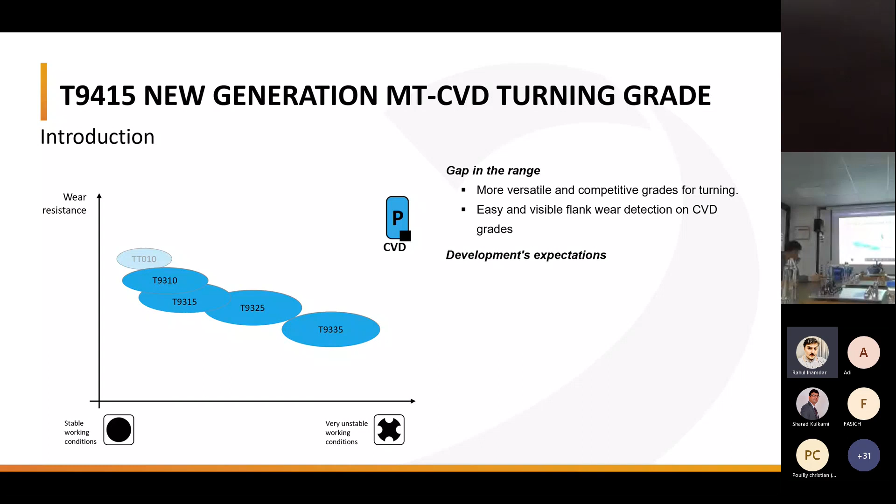We found out that there is some gap in the range which requires more versatility, some competitiveness, of course, of the grade, which can always go for interruptions, also for the harder side, for stable working conditions. And that is why what we have come up with, the requirement as the gap is that we need some reliable grade, some productive grade, at the same time which can give more efficiency and inventory control also at the customer end. That means working for toughness as well as in a similar way working for even the continuous cuts. That means stable conditions for continuous cuts for P05 or P10, P15 as well.

And that is why we innovated T9415. If you can see here, T9415 covers up the range of T9310, which is a harder grade, T9315, again harder grade, and T9325 to some extent. That means some of the light or medium interruption working conditions, application conditions. So that means one grade for many operations, right from P05 to P30 almost.

So moving ahead, a little bit more to introduce you to what can be said about T9415. So typically if you see here, the surface zone is enriched with cobalt bonding phase, which again is for adhesion and toughness-demanding operations where it is required, that can cater to those kinds of demanding operations. Also the new substrate is a functionally gradient material, all new substrate for T9415. Again, the adhesive-resistant TiN layer, abrasion-resistant TiCN layer on top, and again for heat resistance, there is always an alpha Al2O3 layer in T9415.

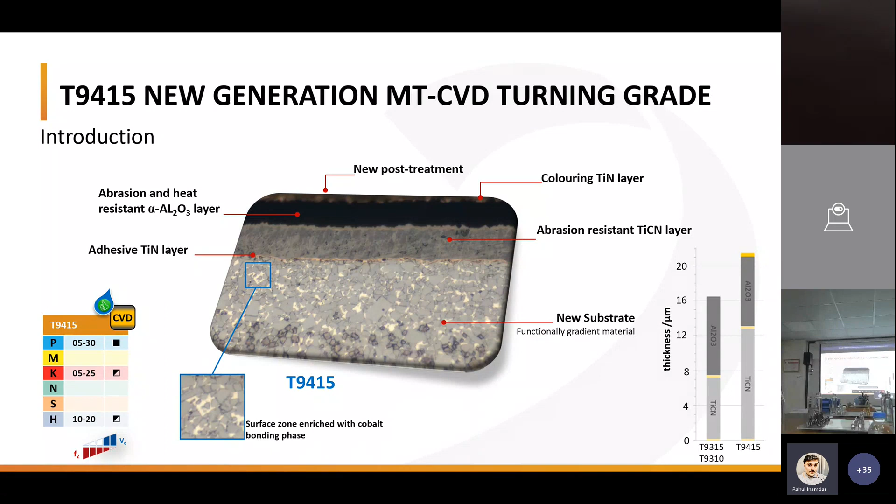Moving ahead, new post treatment process all the way, and this is again one of the unique features which is adding the feather on the crown of T9415, why it is a champion grade, you can say. At the bottom you can see application areas from P05 to P30, and from stable machining conditions to unstable machining conditions.

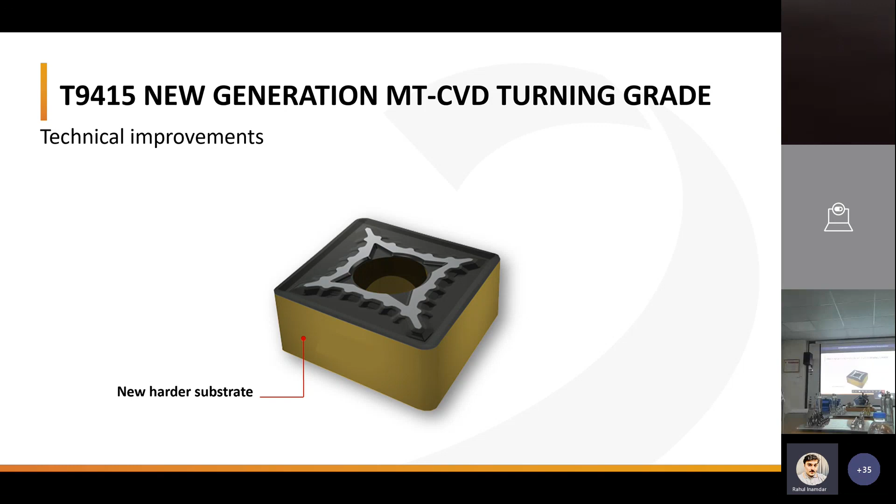Let us move on and see some more technical improvements. If we look closer at T9415 insert, we see a new coupled layout, with new color layout, and many new additional improvements we've added to this fourth generation of CVD coated insert.

Fourth generation of CVD coated insert. A newly developed harder substrate with 5.5 percentage cobalt, which is slightly harder than the previous T9315, but not as hard as T9310. Of course, it is a harder grade.

These inserts are produced within state of the art electronic press machines at our factory, resulting in tight repeatability, tight tolerance of the insert, and this ensures high precision indexability. Please remember, we have very high and tight repeatability insert tolerance, meaning higher precision indexability possibility for T9415.

That means reduction in downtime, fewer cuts for the programmer on the machine, elimination of non-productive times. The measuring cuts, when you make a first cut and measure on the machine, when you give the offset in the controller, that also reduces thanks to this state of the art electronic press machine insert, fourth generation. The new generation is also CVD coating on T9415.

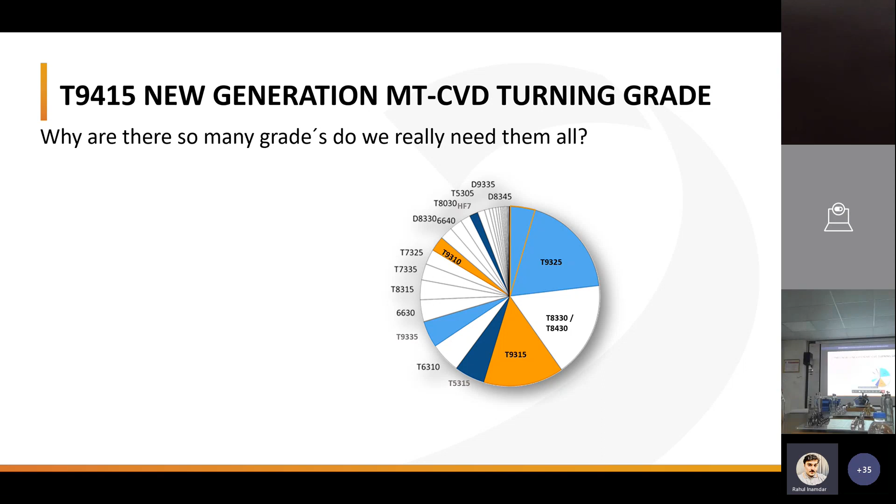T9415, my friends. Moving ahead, let us talk about why we generally have so many grades. Do we really need all of them? Before we look into the new assortment of MTCVD fourth generation, there are different grades for different applications, PVD grades and also CVD grades, each with their own hardness and own characteristics for machining, with different grades and different hardness.

However, when it comes to T9415, which I have conveyed and told you, it covers most of the grades like T9310, T9315, and almost half of T9325. So that covers most of the part of our grade chain as well.

That means, please remember what I said before - sometimes the end user, the customer, must run with lower speed and lower feed, and then compromises with the productivity, compromises sometimes with reliability as well, and then customer has to go for a different grade, different chip breakers as well. But thanks to T9415, we can go towards tougher conditions and harder conditions for longer continuous cuts and also interrupted cutting. So maybe we can squeeze down the requirement from 2 or 3 grades to 1 grade.

Please understand, whenever you visit a customer, always ask the customer why, and what you can do for them, what benefit you deliver to them. Do customers really require 2 grades? And you can always say, Mr. Customer, no problem, I have T9415. Let us go with 1 grade, solve all your problems and all your applications. So, a single grade.

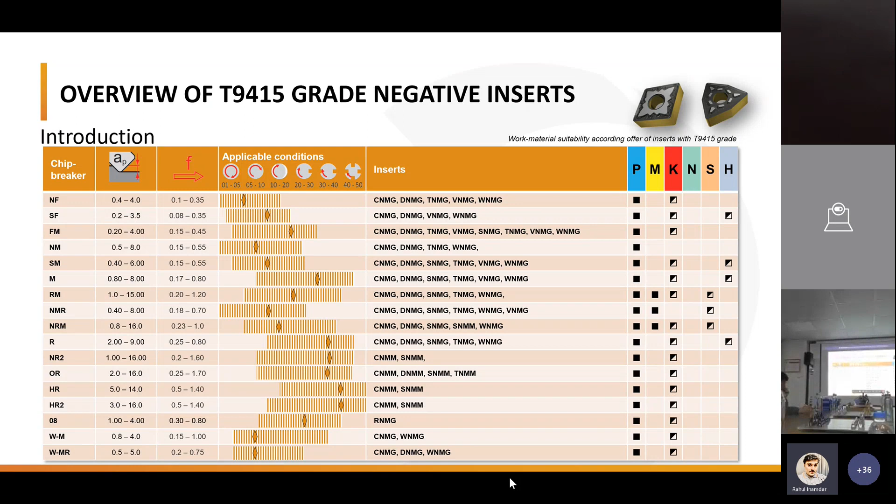So this is a ready reckoner for cutting conditions and chip breakers for negative inserts. This is also available on the website and in the new product catalog, so you can always go through all the chip breaker navigators.

Here I would like to emphasize more and make you remember: whenever you go to the customer, we generally look at roughing and medium machining operations, but sometimes we overlook finishing operations. Remember, the most pain areas for customers lie in finishing operations, because finishing is sometimes the last operation, which can give rework or rejection, and customers always have this pain in mind in their production line.

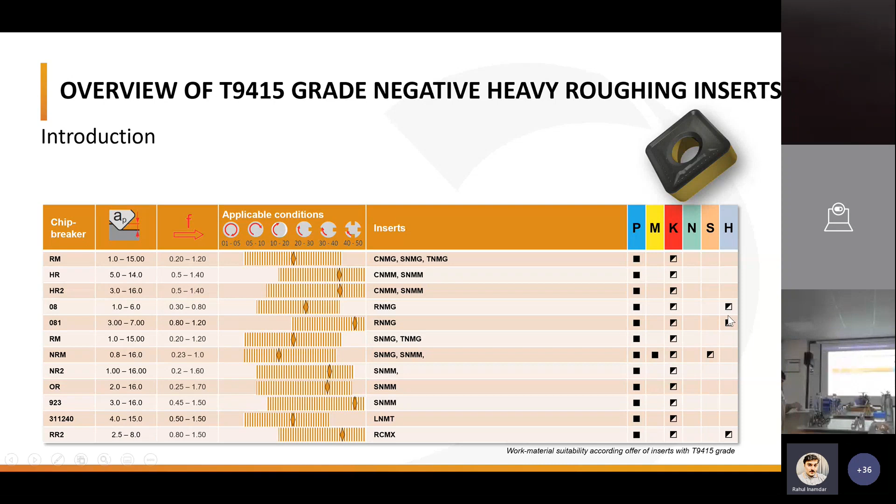So please don't look only at CNC lathes, look 360 degrees. Walk the shop always, talk more, ask more, and see where we can apply our inserts. Let us be more hungry to find where we can give value to the customer, and that will also give us a higher, stronger relationship benefit to all of us.

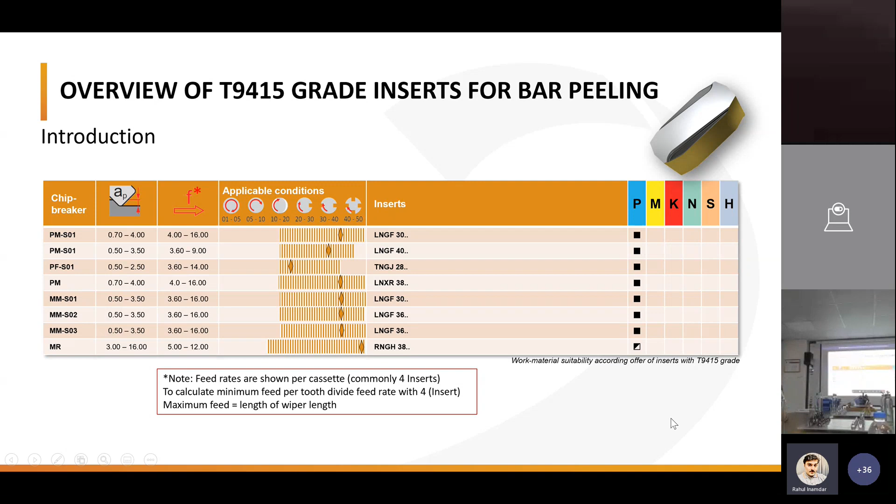Also for railways, we now have an assortment including railway wheel turning inserts and returning inserts. So we have chip breakers available with us for T9415, even for the bar peeling segment. Wherever you have a customer base in bar peeling, remember we have T9415 for bar peeling operations as well - this is a great benefit because bar peeling machine hour rates are higher, so the longer tool life we give, the more benefit the customer gets.

Here again, I would like to emphasize more on the applications like high cutting speed to medium cutting speed, stable machining conditions, unstable machining conditions. We can apply T9415. Customers with the portfolio of general engineering, power generation, automotive, medical, agriculture, railway, bar peeling, metallurgy segment - so where we should look upon, where our T9415 we can apply and take the benefits.

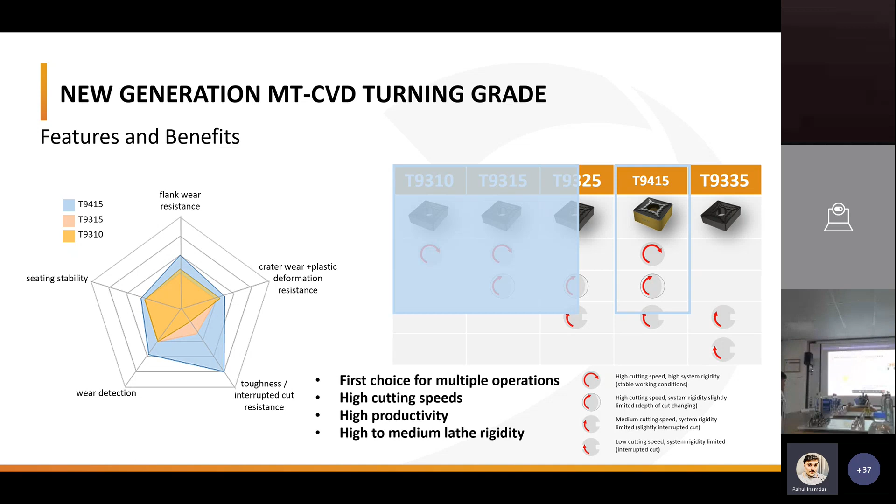You can see here this covers T9310, T9315, and half of the T9325 area. So this is how we should look at it as a definition - high speed, high productivity, even with high or medium rigidity of the lathe machines.

And now you can see, okay, we can go from continuous cut to highly interrupted cutting conditions as well. Some of the oil and gas components, SAE 1045 carbon steel - here also you can see the feed rates and cutting conditions, around 3mm depth of cut, and from 5 workpieces compared to previous ones, T9415 delivered 10 workpieces per cutting edge, so doubling the production.

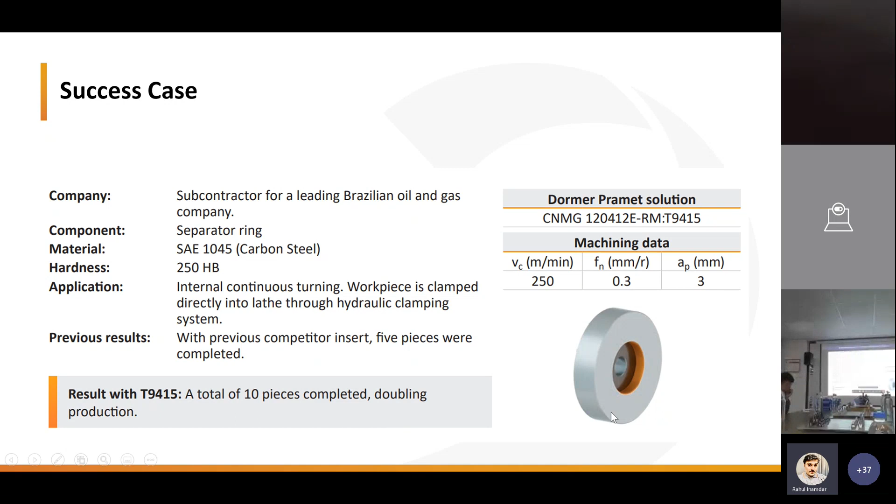That means also reduction in non-productive time and reduction in not only the tool cost but also the total cost. Remember, you always have to remember when you increase the tool life, that means we are also decreasing the total cost as well. So please always talk and remember this in mind.

So whenever this kind of component comes up, please remember apply T9415 because it's the best choice and the only choice available in the market of metal cutting industries, my friends.

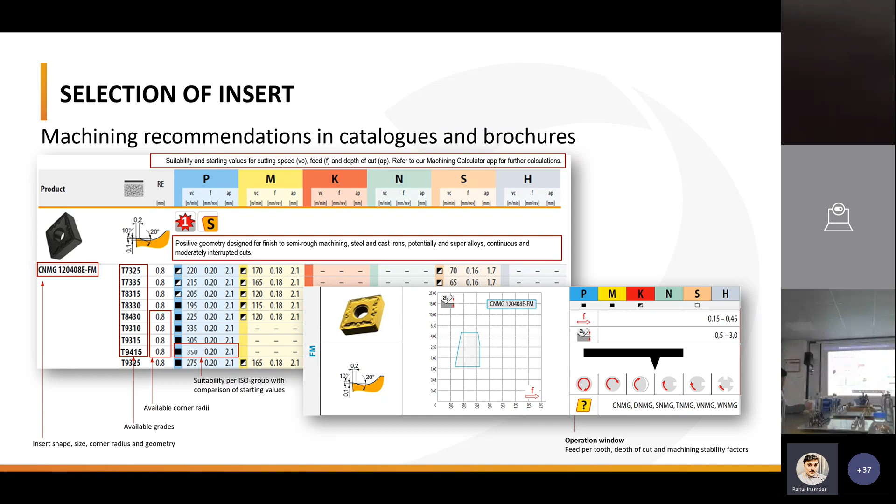Moving ahead, let's talk about the recommendations for T9415. We all know it's available on the backside of the inserts, and also on the web page. I'm sure you'll download the calculator, and from there you can also check cutting parameters. But generally, as recommended cutting conditions compared to our own T9315, you can consider plus 20% compared to T9315.

Again, I'd like to show you this comparison about the longitudinal turning test: endurance in continuous cut, and also endurance in interrupted cutting.

You can see here, from 320 meters per minute to 120 meters per minute in interrupted cutting, the cutting edge of T9415 - you can see the flank wear - compared at the same time to T9315 and T9310.

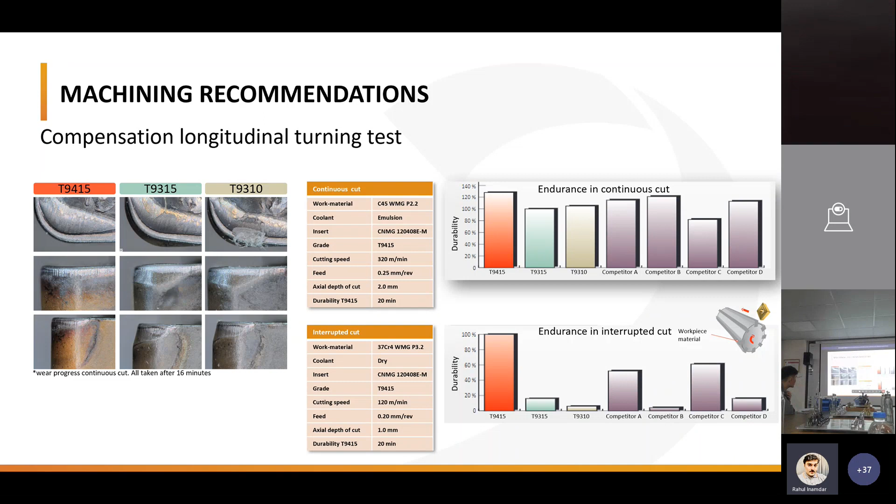This is amazing, I'm super excited. I'm very confident looking at these wear conditions of T9415. What else do you require, my friend? This is the best you can carry now with you to our customers.

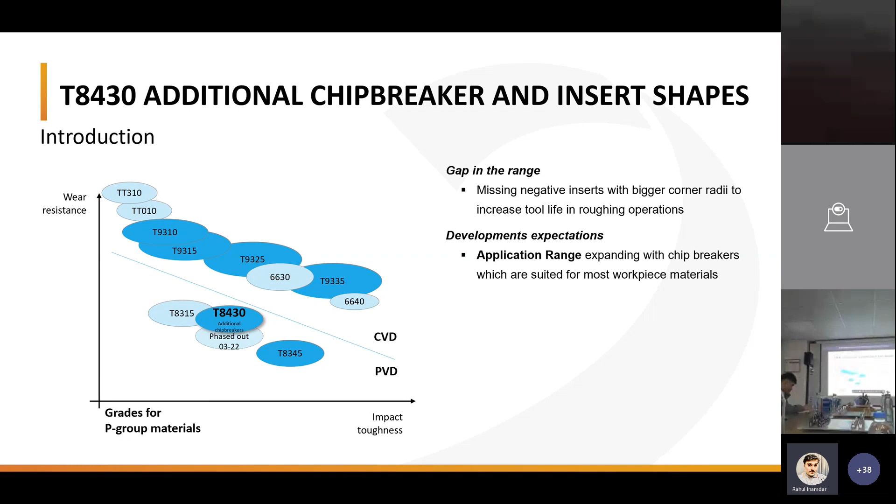And to fill this gap, we have introduced an all new T8430. You can see here the new symbol on the slide, introduced in this new product launch.

Again, T8430 has a submicron grain substrate, less than 1 micron, with relatively high cobalt content, and the substrate has undergone improved ion cleaning with perfect adhesion to the coating layers. You can vouch on that.

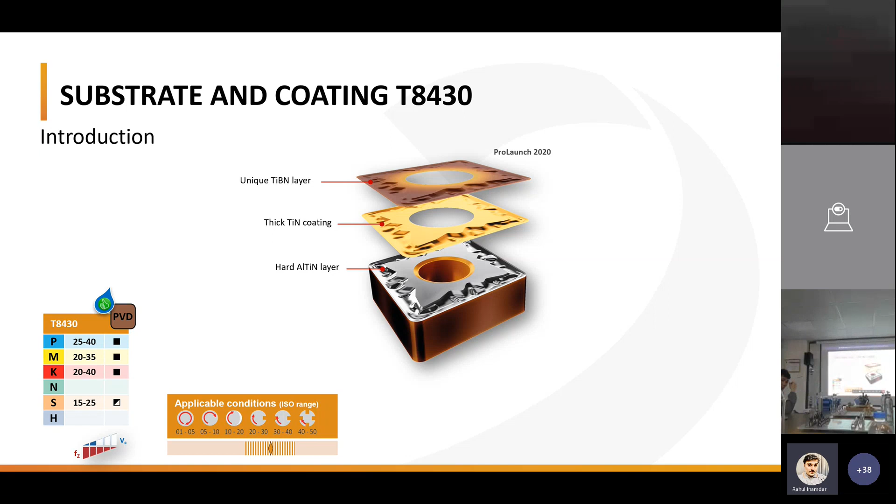This was launched in 2020, and in this new product launch we have the additional negative insert with chip breaker NMR, NRM, and RM, as you can see in this slide, along with shapes like CNMG, SNMG, TNMG, and so on.

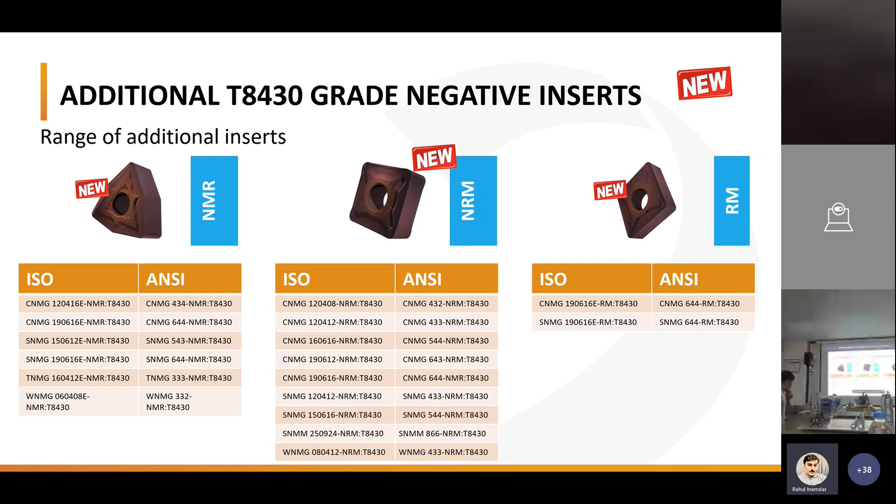Also the range of additional inserts: CNMG in 1.6 nose radius with NMR geometry chip breaker, also CNMG with 0.8, or SNMG with 2.4 millimeter with the NRM chip breaker, and similarly 19mm SNMG with RM chip breaker. Here you can see the overview of the product portfolio of chip breakers for negative inserts.

So that is all can be read from our web as well, and also from the insert box. So moving ahead, if I talk about the positive insert, we have the product portfolio of chip breakers.

Please remember, if you establish finishing positive geometry, positive inserts on the machine, that business will last longer. It will not be replaced immediately or easily by any competitor.

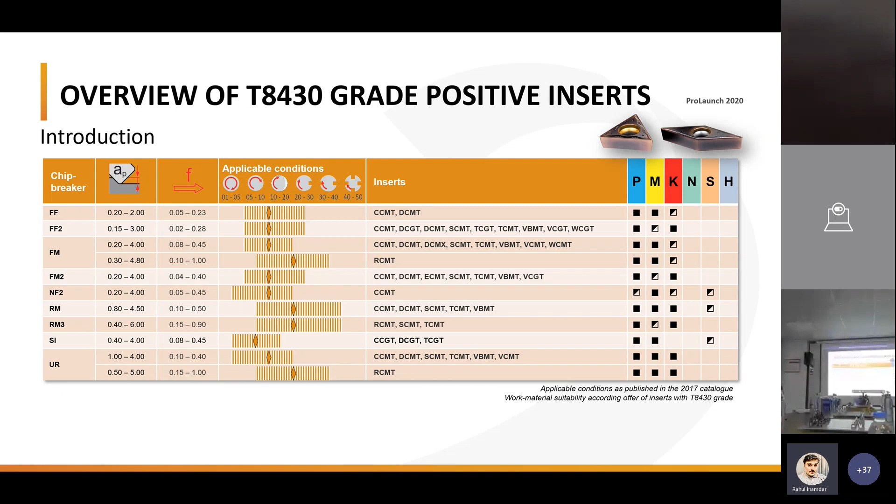When it comes to customer segment, components, application, workpiece material, and competition, you can refer to this chart even afterwards. It is for general machining, automotive subcontractors, maintenance and repair, automotive industries, and all sorts of materials you can consider.

When I talk about the sales information, the benefits for the feature - what is the benefit about improved ion cleaning? It ensures perfect adhesion between substrate and coating layers, which increases dimensional accuracy, consistency, and repeatability in dimensions.

What benefit does the TIB top layer give? It reduces built-up edge, because some materials have a tendency of stickiness, welding on the cutting edge - we call this built-up edge, for ISO M type materials, even low carbon material. This top layer helps reduce built-up edge, which increases process security, repeatability, and productivity.

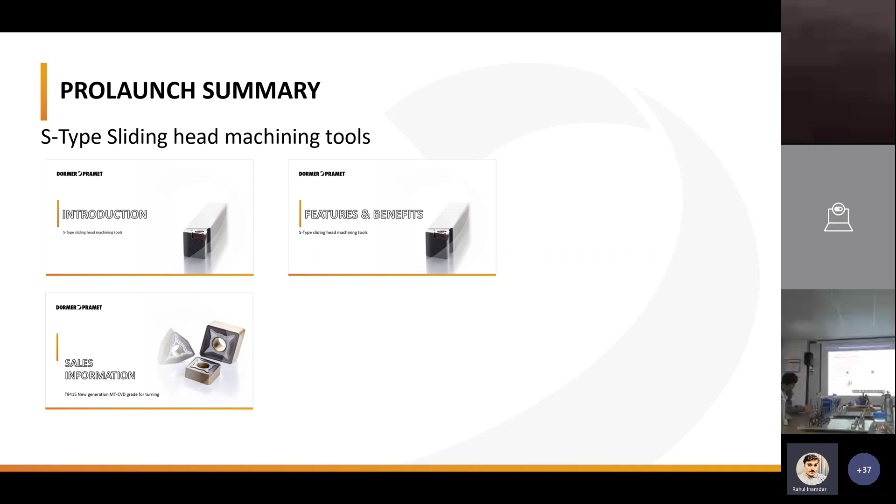When we talk about these S-type sliding head machines, in our actual turning assortment we offer small shank size turning tools. But when it comes to sliding head tools, we generally do not offer any kind of these tools.

But with this product launch 23.1, we introduce a new range of turning tools which can be used in sliding head machines, also commonly known as Swiss type machines. These machines are generally used to produce small parts in very high volume.

As much as possible, tools are equipped on the machine, and the machine offers the possibility to run multiple tools at the same time on the workpiece. This dramatically lowers production time and reduces cost per piece. So we offer smaller shank size tools for sliding head machines.

Here you can see what is in it. With the SCACR or L external sliding head tool we launch now, we extend our assortment of tools which we can use in this type of lathe.

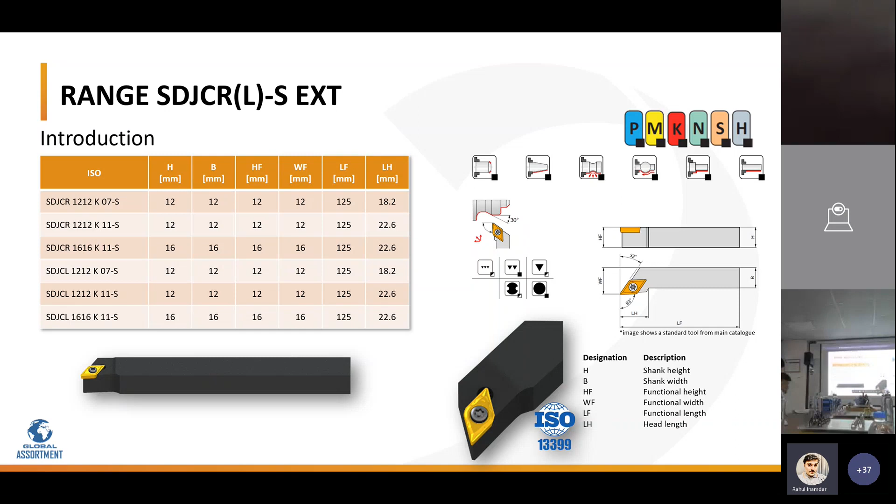Similarly, you have SDJ for D style insert, screw lock tools for 93-degree cutting edge angle for positive DC style inserts. That is available for DC style insert in 7 and 11 millimeter insert size.

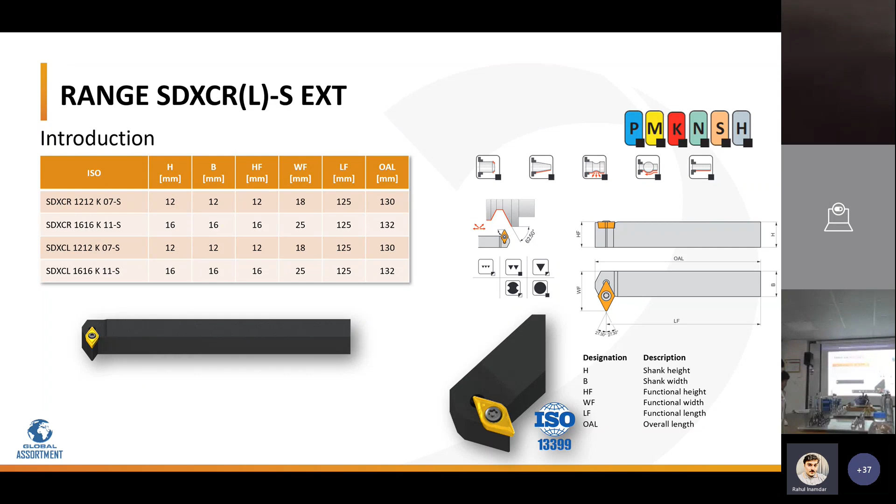Let me repeat and remind, this tool has the same functional width WF as the shank width B. Same functional width, meaning you can generally say and talk about a zero offset. So we have now extended with this tool, even tool with SDX, CR and CL. That is also now available in our product launch.

New SDU-CL type holders, 93-degree cutting angle with shank size of 20 millimeter, 22 millimeter, again for even 7 millimeter DC style inserts. So that is very important, and be aware of it when using them in a sliding head machine. This is for external machining operations.

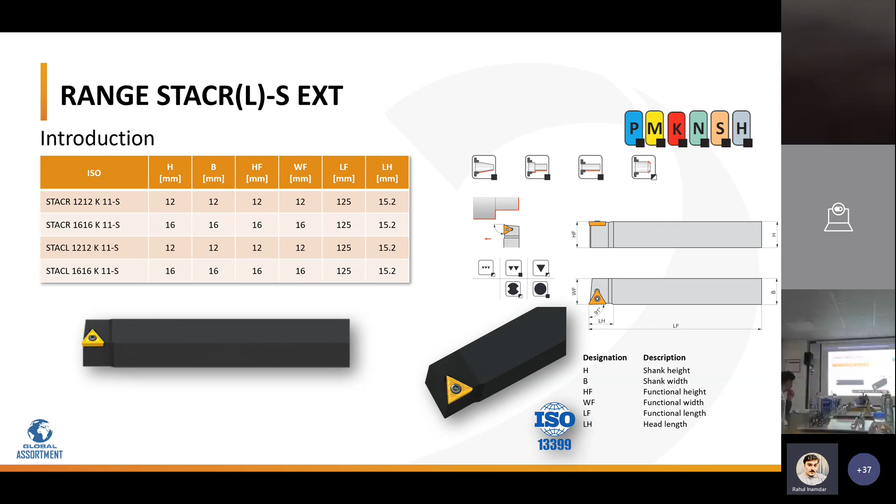Again, a 91-degree cutting edge angle for T style insert, TC style insert, 12 by 12 and 16 by 16, four tools. That's important. Again, what are the typical customers?

Components, electronic industry - my friends sitting in Vietnam, Japan, Thailand, Indonesia, even New Zealand, or in different places like Malaysia. Small tools, small sliding head machines like Citizen, Star, Tsugami, Hanwha - those machines. Now we have tools for them, for medical industry, for aero industry, and so on.

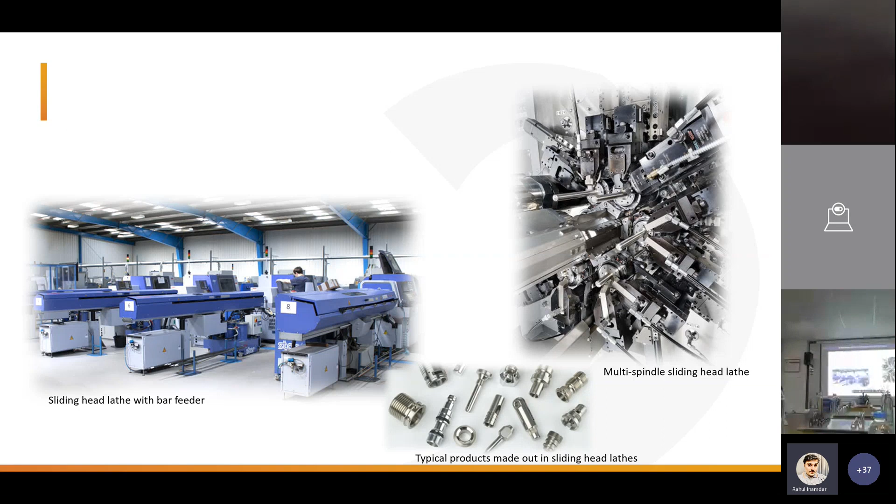So if I talk about the benefits, you can see here the small parts which we have been referring to. As explained in the previous slides, the main topic for sliding head machine is to produce as many parts as possible, at very high speed, and the functional width WF is the same as the shank size B.

You can see here the tool holder is sliding from one tool to another. That means the previous cutting edge - if the tool is replaced, the cutting edge is at the same position as the previous insert. You are with me, you follow me? When you replace the tool, the cutting edge is at the same position as the previous insert.

So that is to be remembered. But also remember, this is valid for different insert shapes - the positioning from new insert shape is more precise compared to a common tool holder. Also remember, tool types SDFC, SDXC and SDUCL do not have the same WF and shank width B, meaning these three tools cannot be replaced as explained in this slide. So that has to be remembered.

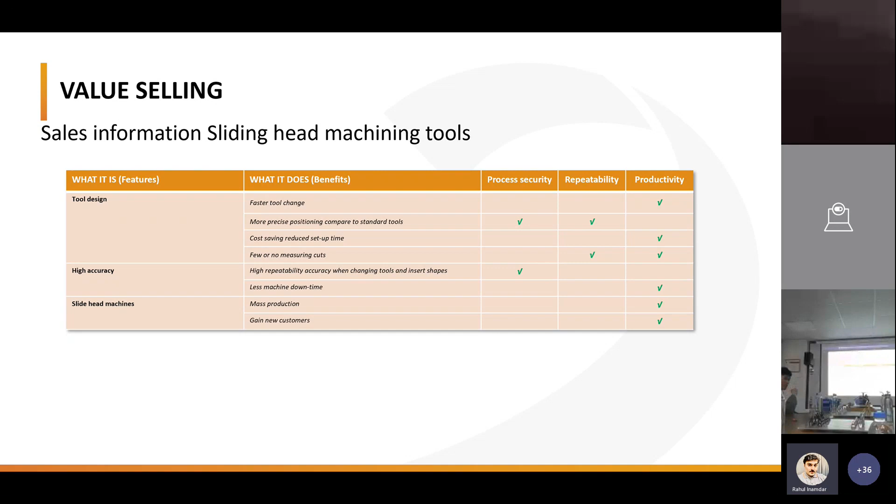That means faster tool change, zero offset, more precise positioning compared to standard tool, cost saving, reducing setup time, and you can also count on few or no measuring cuts. So that means it's straight - you just put it and start it. Isn't it interesting? That is interesting, my friends.

So this is about the new assortment for sliding head machines. Moving ahead, let us talk about the extension in the KR chip breakers.

When it comes to the KR chip breakers, we have inserts with the KR chip breakers. So we are doing expansion of insert shape and radius with the KR chip breaker. We found some missing gap in negative inserts with bigger corner radius to increase roughing capability in cast iron and hardened material. So this is the KR extension here with us in this new product launch.

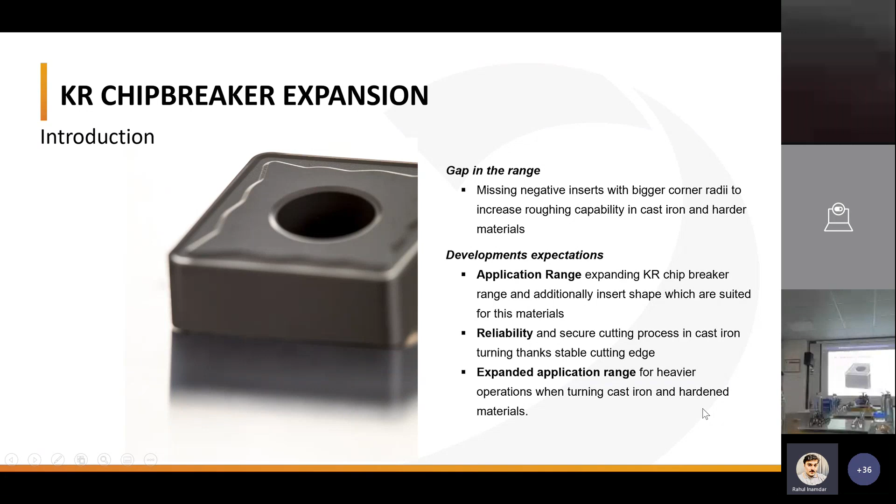So to meet the expectations in cast iron applications or hardened material applications.

Moving further, we all know the coating T5315 for cast iron turning with WC cobalt based substrate, which ensures an optimal ratio between hardness and toughness and resistance against plastic deformation. It has a textured Al2O3 layer, which offers improved abrasion and crater wear, and the grade with high hardness provides the basis for highly productive machining with the highest cutting speed, my friends.

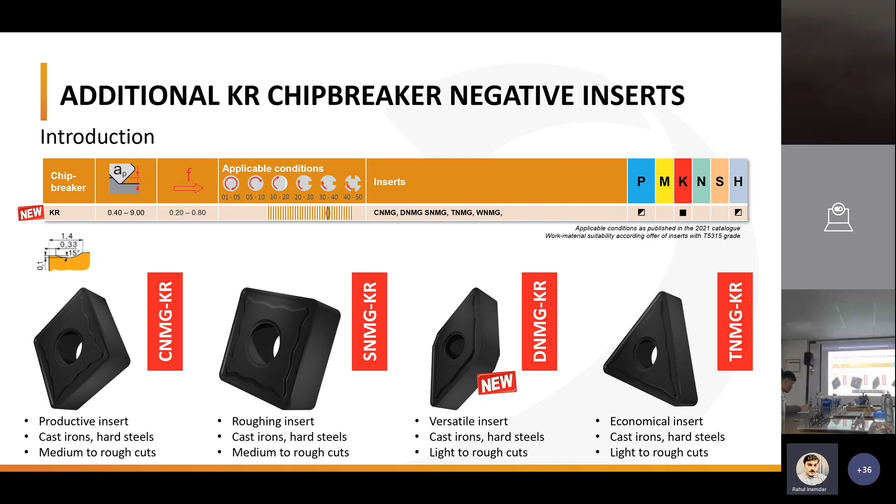So looking ahead, what is new? The KR chip breaker in CNMG, KR SNMG, and also for DNMG, TNMG insert as well. The newly added inserts feature a strong KR chip breaker with a wide neutral T-land. Wherever you have a lost application, or when you visit customers and find roughing of cast iron, skin removal cast iron, or chilled iron where we don't have it in our kitty, now you can have the new KR chip breaker in our assortment. Please apply this KR chip breaker with this product launch in March 2023.

DNMG inserts are also now available in two different radius versions. This shape is ideal for versatile turning applications. Whenever you find, for example, differential cases, cast iron components, carriers, housings, where the material is FCD 450, FCD 500, or even higher tensile strength cast iron materials, these are the choice.

Components like motor body housing, cast iron housing, disc, brake housing, even calipers or cylinder liners - those components, my friends, where we were lacking with products - now we have the products in our hand. Apply the products to those components. Now we have a chance to say yes to the customer, yes to the applications, my friends.

So if I talk about the customers, as I told you, general machining, heavy duty, all sort of components and so on. For this components and workpiece material, we have competitors like Sumitomo, Tungaloy, or even Mitsubishi. So please try to hit them, and then you can get the highest level of benefits out of this new grade, new chip breaker in KR.

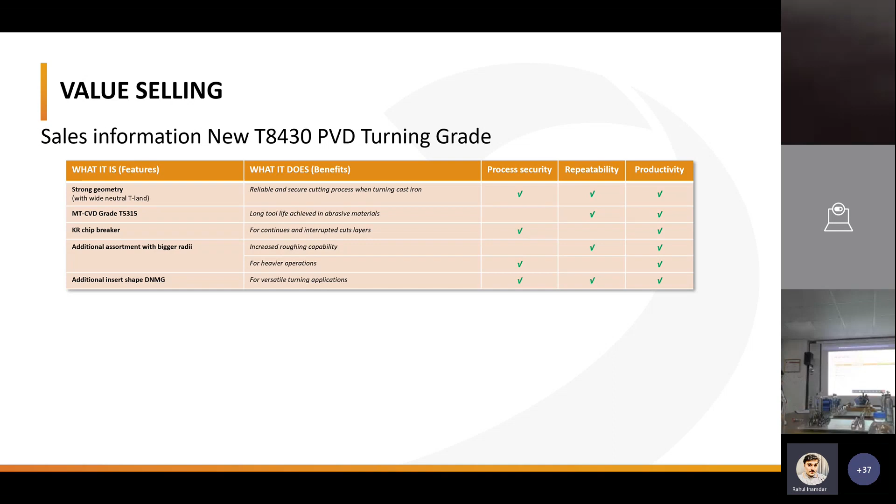Moving ahead, some features. If you ask what is the benefit of the KR chip breaker - it is for continuous and interrupted cut layers, as well as versatile turning applications. So this is about the KR chip breakers in turning, and we are almost done with the turning part of the new product assortment.

So to summarize, what we have seen is our new champion T9415, expansion in T8430, expansion or new chip breaker KR, and also different extensions in other inserts as well. So this is about the turning.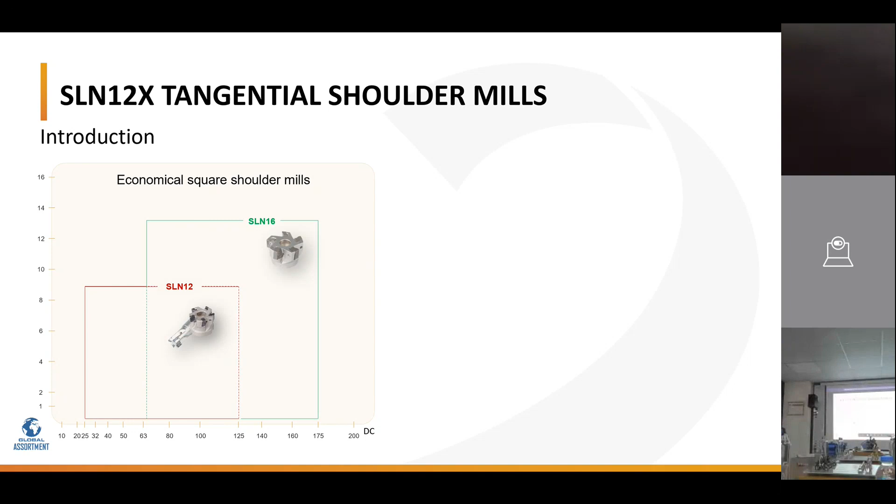Moving ahead, let me introduce you - we already have in our economical square shoulder milling solution SLN 12, and also SLN 16 up to 150-175 millimeter diameter range. But at the same time, we found gaps for tools with improved body strength and thick cutter core, and also a gap to find cutters for lower cutting force machines that also reduce spindle load, as well as tools that can be very high productive tangential tools, additional to the economical concept of tools, for a wide range of applications.

So considering everything, the expectations were a true 90-degree corner, improved wall accuracy and straightness, and very competitive lower cutting force. So those are the expectations and the gap.

Considering that we have come up with this additional new concept for tool shoulder milling to improve customer productivity, right from diameter 25 to diameter 125, both in parallel or Weldon shank and also in shell mill. So, after a successful introduction of the SLN 12 and SLN 16 economical tools for square shoulder milling, this project has started to further expand the offer of SLN 12 millimeter into the tangential family, tangential cutter.

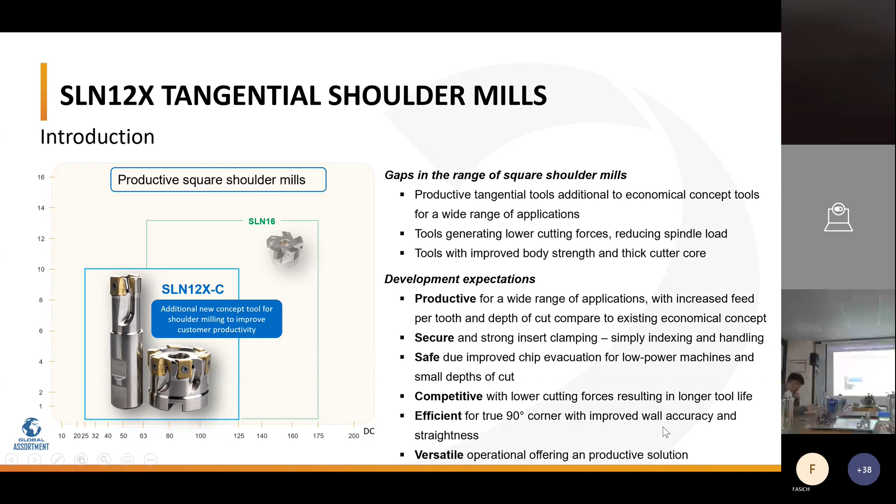Furthermore, some positive rake angle combined with a patented U-groove segment, to enhance chip evacuation and ramping possibility. As a result, for depth of cut up to 10 millimeter, this is the family, this is the concept tool SLN 12, now with us as a new product in 2023.1.

So moving ahead, you can see it is available in both end mill design with diameter 25 to 40 millimeter. When it comes to the depth of cut, it is up to 10 millimeter. And also for shell mill design, it is from 40 millimeters to 125 millimeter.

But if you see here, the SLN 12C cutters are for 9 millimeter depth of cut, and here this cutter is for the 10 millimeter depth of cut. So this is what you can say is a truly 90-degree, enhanced productivity, low cutting force generation cutter, duly developed.

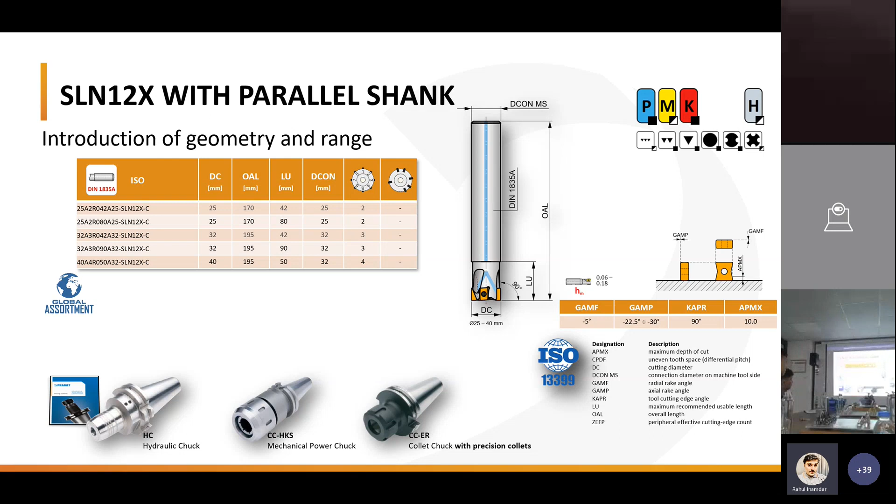At the same time, looking at the parallel shank of the cutter, it is from 25 millimeter to 40 millimeter. The most interesting and important part is it comes with internal through-coolant cutter design, so when you go into deep slots, this will be most beneficial for higher tool life and also for chip control. This can go with ER chucks, hydraulic chucks, or mechanical power chucks as well.

Again, with Weldon shank, right from diameter 25 to 40 millimeter, available with internal coolant facility also. With the shell mill, right from 40 millimeter to 125 millimeter size of cutter diameter, with inserts like 3 inserts per cutter to 12 inserts per cutter. You can see here in the layout, it's a 90-degree cutter, the assortment.

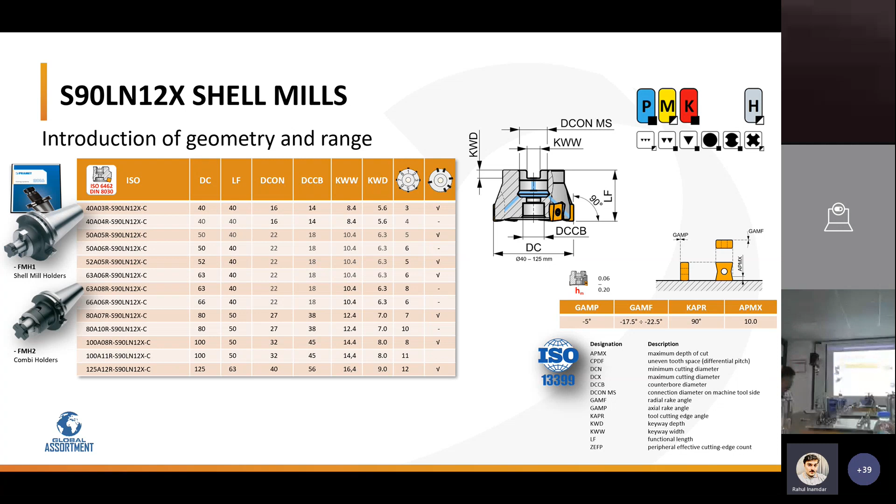Moving ahead, you can see the different geometry like F geometry and all, in PVD grades available like the 8 series, 8310, 8330, 8340, and also M6330 grade as well.

So when I say M6330, it is basically primary for semi-finishing to finishing in ISO P. When I say 8310, it is PVD coated, primary for finishing operations for P group, and secondary for ISO K and ISO H group.

But when it comes to M8340, it is PVD coated, primary for semi-roughing and roughing for P group, and secondary for K group material. But again, this grade is also versatile for different groups of material.

So M geometry also we now have in LNEX 12 millimeter insert in our kitty. M geometry is basically a positive geometry with medium T-land of 150 microns. It has got a 27-degree rake angle as well, and that is basically for medium to semi-roughing machining for ISO P and ISO K group materials, and secondarily for ISO H group materials.

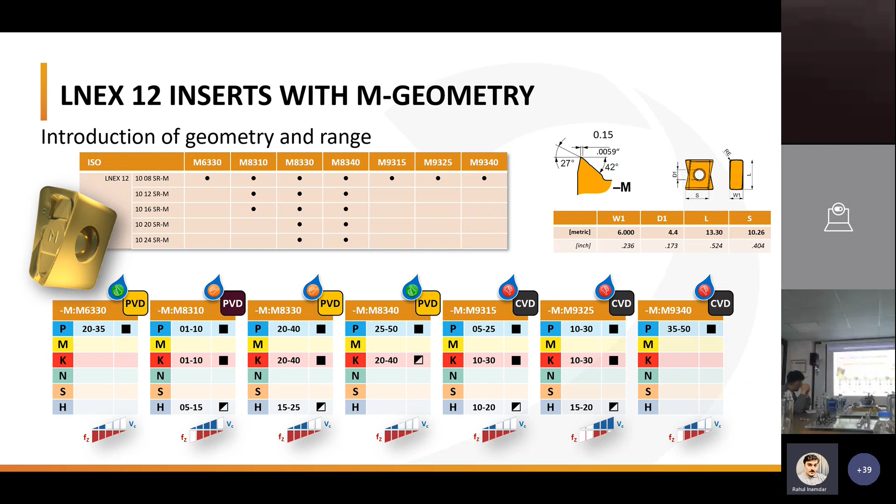This is available for customers like general machining, die and mold, pump and valve industries, medical industries as well, and also machine tool makers. It has got a wide range of applications like shoulder milling, deep slot milling, shallow milling, face milling, ramping, and true 90-degree wall finishing as well.

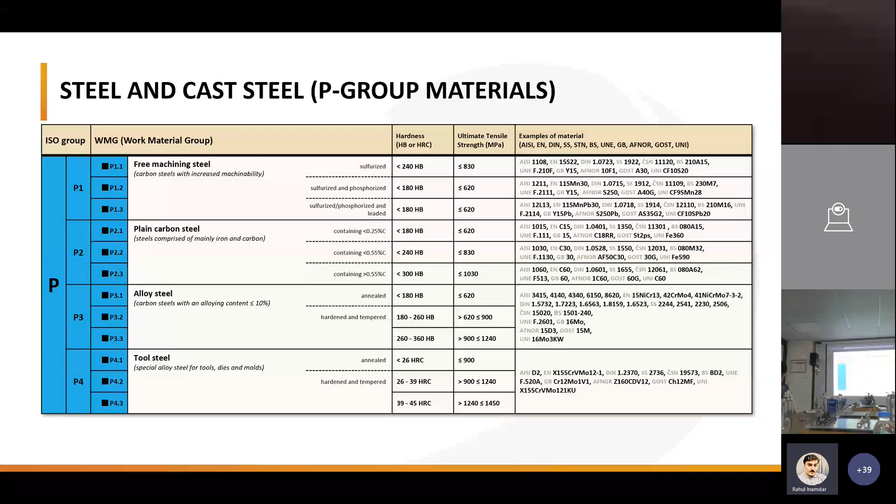So if I talk more about the features and benefits, even for the steel group of material, which can be referred to as WMG, workpiece material group, in our catalog, you can see here a bit on the F geometry, which is a robust 4-edge insert, positive rake, tough tangential insert, with patented U-groove segment.

So the U-groove segment is in the corner geometry of the insert for excellent chip forming, ramping facility, and also lowers the risk of chip jamming, which expands the application range for low power machines and small depth of cut. So remember, 4 cutting edges, very robust insert, even for low power machines.

I can tell you, you can go and put it even on the conventional milling machine, maintenance shop, repair shop as well. No need to fear, no need to worry at all. So that is again a benefit.

Patented U groove, I explained you. It is good for the ramping, and also it gives excellent chip forming and chip evacuation for operations like slot milling, deep slot milling, which lowers the risk of chip jamming. The geometry as SRM, which is again positive rake on a tough tangential insert, 4-edge tough and robust insert.

Basically as LNEX 12 millimeter. And this geometry is also a positive geometry, excellent surface quality, which can produce with PVD coating, and so on. Because of that, you can see the easy recognition of geometry and corner radius at the back side of the insert as well.

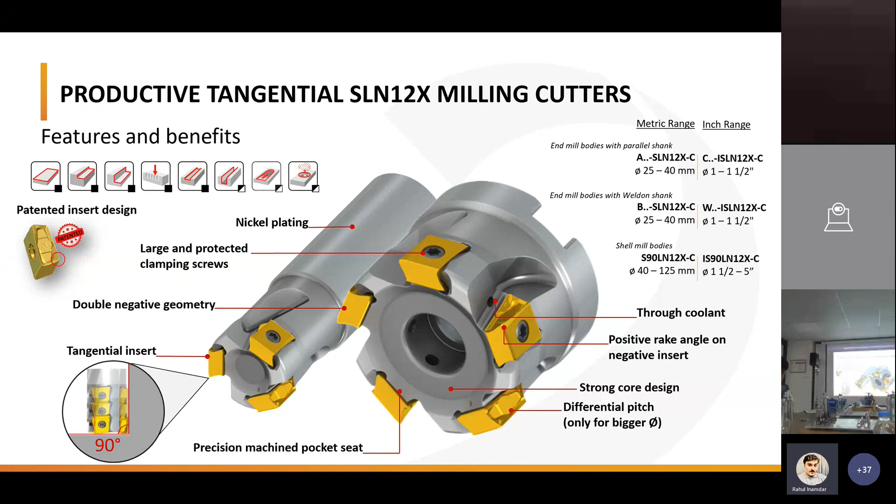So differential pitch is also available at bigger diameter - above 40 millimeter cutter diameter, differential pitch is available. And why is differential pitch required? The question comes - differential pitch reduces the risk of generation of vibrations, and the subsequent onset of chatter, resulting in a smoother machining operation when it is differential pitch.

So you can see here at the center, the core strength is higher. So it can withstand higher cutting load, and enlarged core thickness helps us in reduction or elimination of cutter deflection while doing slot milling operations, my friends.

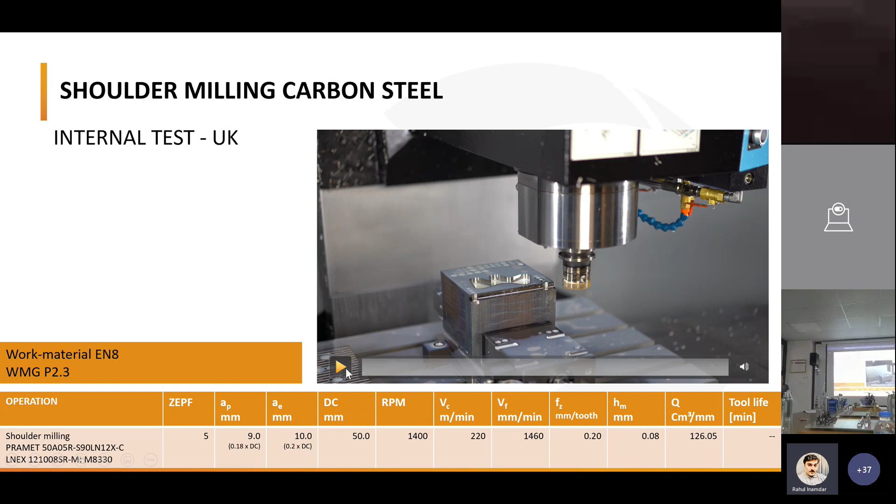Let me try to run the video. I think the sound is not there. Let me try to switch on the sound as well.

I will try to share with the sound. Okay, can you see the video and hear the sound? Yes, I can hear, the video can be seen, the sound is not so clear. Okay.

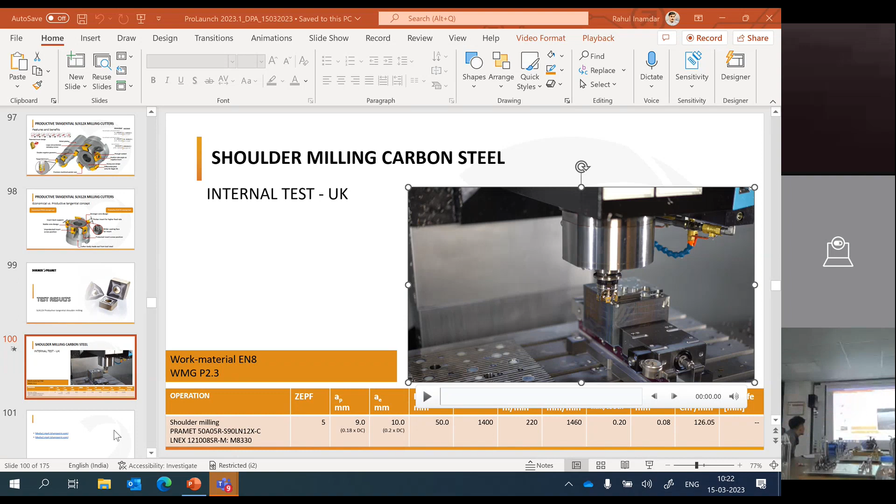So here you can see the shoulder milling, which has got a 9 mm depth of cut, my friends, with the 12 mm insert, engagement 10 mm. So this is the capability of this cutter concept, LNEX 12.

Let me also try to see how I go with this video. Maybe I'm finding some difficulty in producing the sound, but let us watch the video. Can you see the screen? Just a minute. Yes, Rahul.

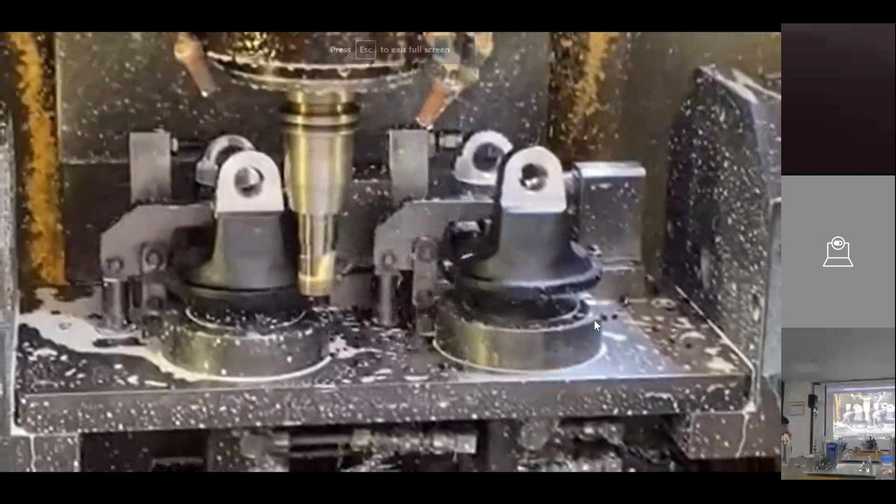You can see direct on the forging at the side, high forging draft, my friends. See the depth of cut, see the engagement, listen the sound, very low sound, no deflection. Amazing. See the chips. Excellent.

And you can see here, this is the capability of the LNEX 12, my friends. So let me share once again the presentation. If you could see the video and the applications, since because of some technical hiccups the sound was not there. But at the same time we are all engineers, we know metal cutting, and you could have seen the capability of the cutter, the chip evacuation, and the way of engagement of the cutter. Amazing, excellent. But I will share all the links and videos to you all so that you can watch and enjoy the sound at your screen at your time.

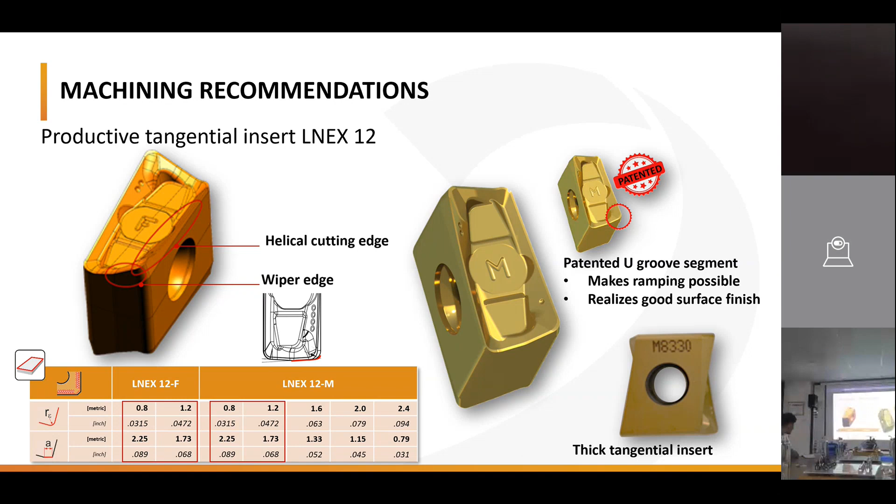So again, when we talk about the machining recommendations available for the cutter inserts and also on the web page, you can see here the insert, the geometry, and also the edge and the cutting edge. So again, it's a four robust cutting edge. When I talk about the features and benefits, what is the benefit of the double negative geometry? It improves the cutting edge strength and directs the forces towards the workpiece, and so on. It's through coolant, which means increased safety and easier chip evacuation, prolonging the tool life, cooling the edge and also cooling the workpiece. So these are some information and benefits of the features, my friends.

So going ahead, I'm very excited about the LNEX 12, and I request you all to look around, talk with the customer, and find the opportunities. Here I would like to talk about the SSD13F product launch.

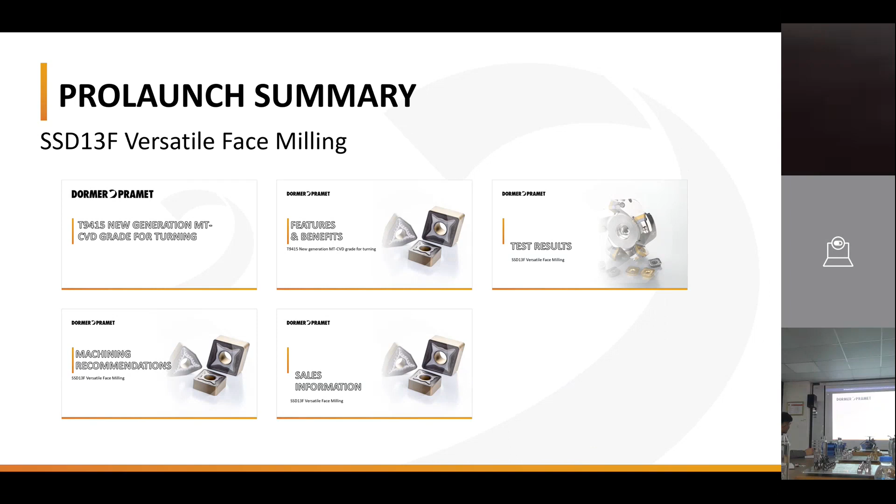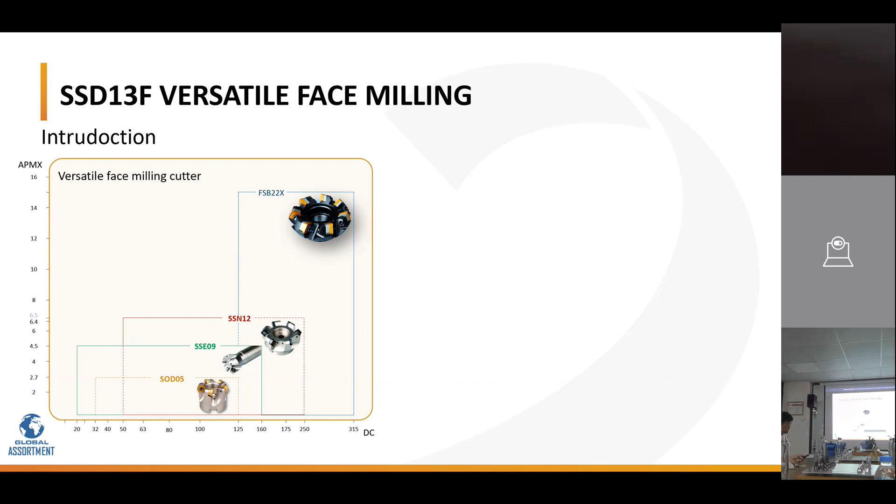So it's again in face milling application. We all know that when it comes to face milling application, we have a versatile face milling cutter with the OD style insert in 05 millimeter, SE style in 09 millimeter, SN in 12 millimeter, and SB in 22 millimeter of insert, so we have the assortment. However, our actual face milling assortment has three families: OD05, SE09, SN12, and one more cutter family in this face milling area, SB22X, which is designed for high metal removal rates.

But for the face milling, shell milling, and face milling operation, the SSD13F cutter diameter range, with some range and depth of cut optimized for general engineering application, also maintenance, repairs and overhauls, there was a gap that has been identified in this product launch with the SSD13F family. So this has been addressed and identified, these challenges and demands, with this product launch, which offers inserts in full material group, which also offers higher durability of cutter body protection and all.

For the positive inserts, positive cutter, you can see shim protection inserts with the cutter body. So what's new is the diameter range from 32 to 250 millimeter with a depth of cut of 6.4 millimeter straight away, as you can see here. We may go away with the SN12Z cutter family, because it has been covered by the SSD13F assortment with positive inserts. So SSN12Z range will be replaced by this new product launch later on.

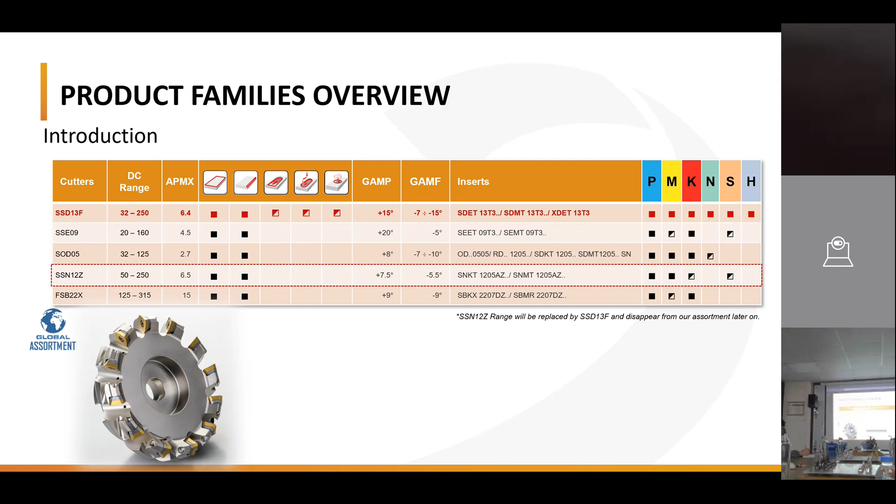You can see here the Weldon shank type design from 32 millimeter and 40 millimeter, which you can use for chamfering operation, also face milling operations and finishing operations, which can be done even on conventional milling machines as well, my friends.

Shell mill cutters right from 40 millimeter to 250 millimeter, again with the internal coolant, also with some differential pitch cutter. So that's very important to remember.

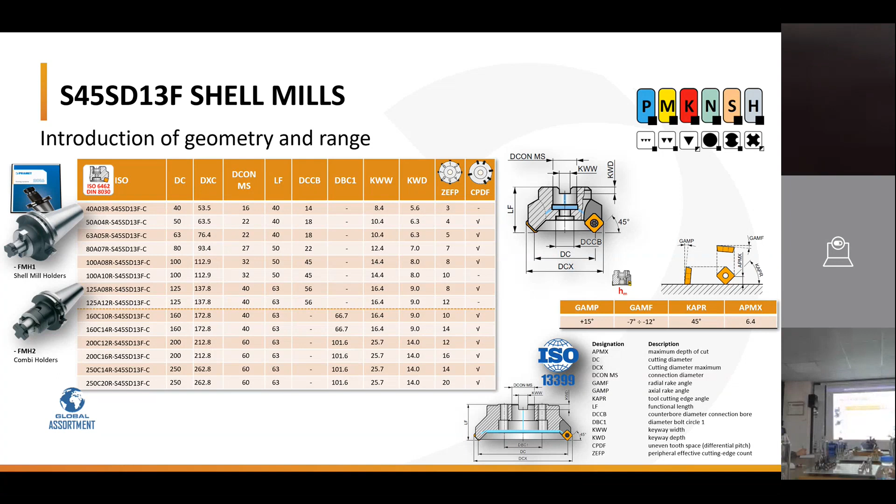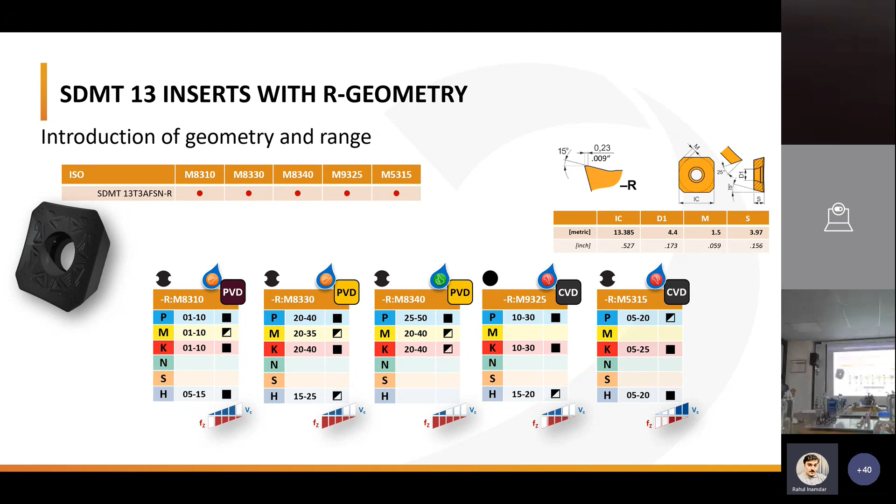Also, the R geometry is a very strong designed insert, primarily suited for ISO P, K, and H material, and secondarily for ISO M material, with different grades of CVD and PVD coating.

Also, we have the F geometry and FA geometry with us. The FA geometry is a highly positive geometry with 18 degree rake angle and sharp cutting edge, designed for fine finish, medium machining, primarily suited for ISO N material, which is aluminum, copper, non-ferrous materials, and so on. Two grades are available, uncoated HF7 and PVD.

M0315. My friends, we have a wiper insert also in this wiper geometry, with 25-degree rake angle, and wiper design, we all know, improves the surface finish primarily for all P and K group.

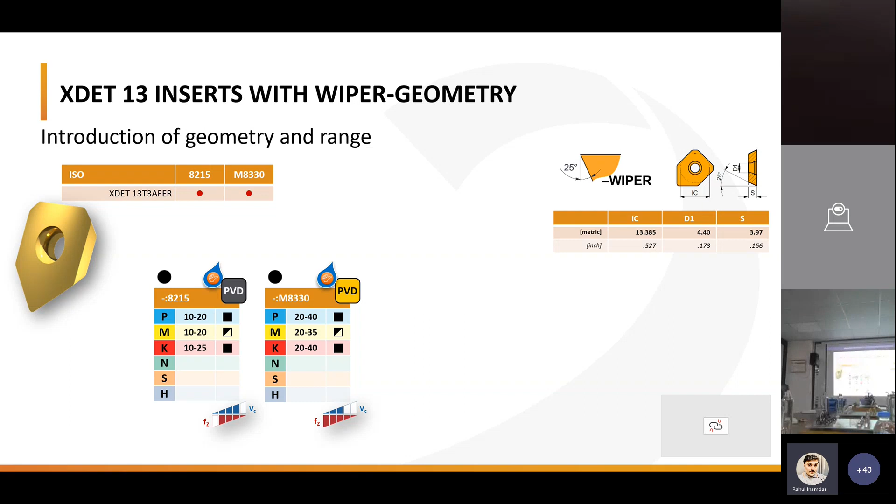I also want to emphasize, please don't hesitate to apply this cutter not only on vertical machining centers or CNC machines, but also for conventional machines or in maintenance repair shop, workshop, or job shop machines as well.

You can see here in this slide, this picture, it's a through coolant carbide shim seat. So when the insert damages, it will not damage the insert pocket or the cutter pocket, so it will last longer.

Also, I want to tell you one thing. Whenever you go to industries like injection molding machine manufacturers, wind power, also machine tool makers, where they are using finishing cutters for finish milling operation, face milling, where they require flatness, straightness, surface finish, this is the first choice you can go with and you can vouch on it.

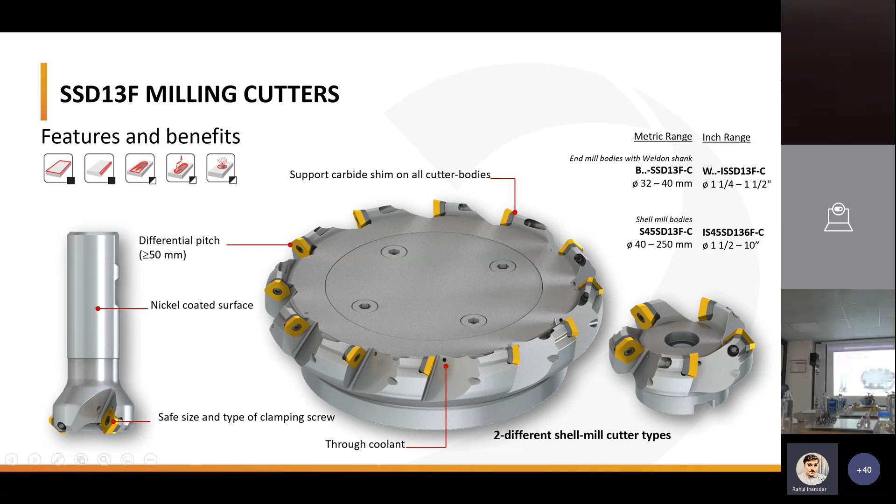So my friends, don't hesitate, remember whenever it requires straightness and flatness, geometrical accuracies, this concept - SDMT 13, SDET 13 inserts and wiper inserts are the choice for that. Please do not hesitate, please apply this. This is, I can tell you, the best mantra and champion for finish milling applications.

If I show you some of the videos here, please let me know if you can see the video. Can you see the video screen, please? If anyone can confirm - yes, can you see? Yes, we see. Can see. Yes, yeah, yeah, thank you. So you can see here,

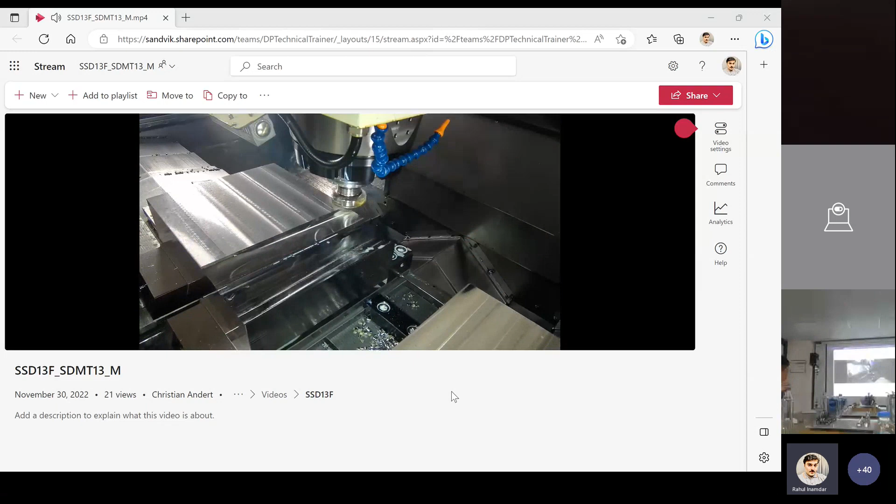See the chip evacuation. And see the surface finish - it's a mirror finish, my friends. So whenever you require this finish, mirror finish, as well as straightness, flatness, lower steps over the cuts, this cutter is the key.

Don't hesitate to put it even on conventional machines. It has got the power, it has got the characteristic to perform even on conventional machines as well.

Let me also open this video. Can you see this new video as well? Yes, we can see it.

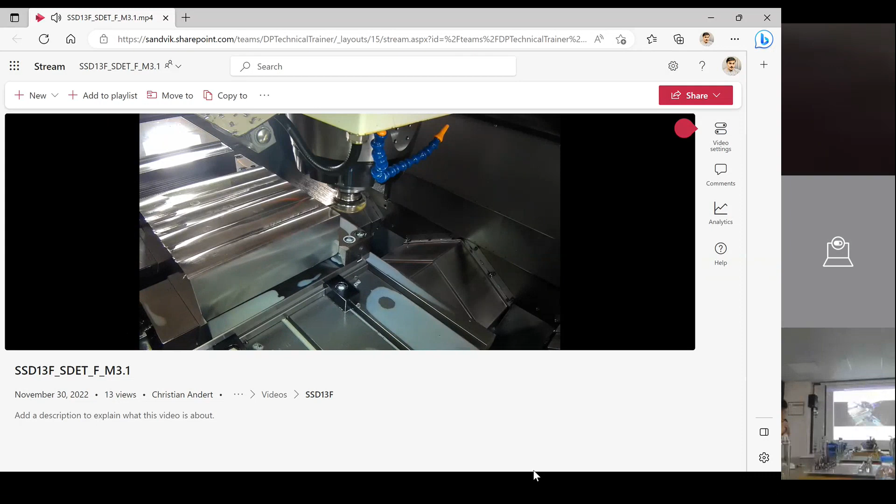Thank you. You can see here the stainless steel material. Even on the stainless steel.

So you can see, not only in steel, even stainless steel, cast iron, aluminum - this is a choice for you. And you can see the surface roughness value is 0.6 RA, 0.6 RA. Can you believe it? 0.6 RA value. Amazing, very high level of surface roughness value, 0.6.

So moving ahead, you can see here again the inserts are protected with the shim, and you have the shim screw. You should apply the maximum torque on the screw, which is 3 Newton meter. Don't forget to do so.

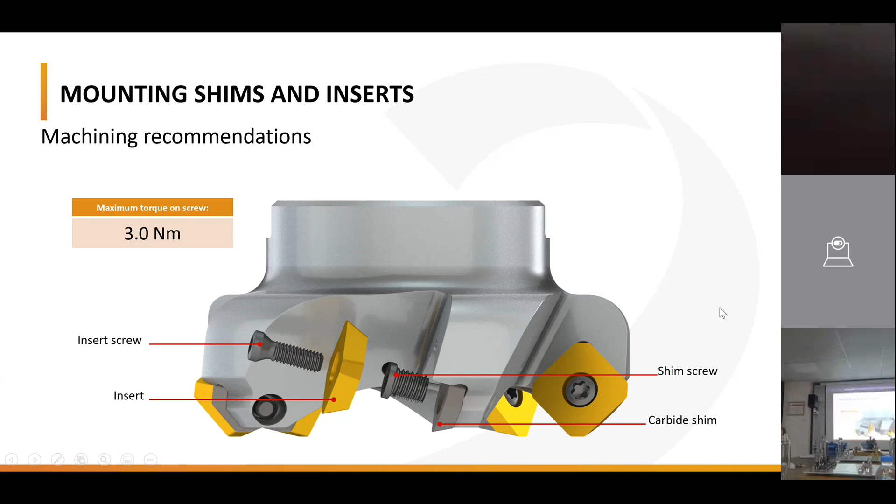Please remember this. And when it comes to the benefits - surface finish values, various milling grades, and different geometries for different materials. High level of geometrical accuracies can be achieved by this insert and cutter family. So moving ahead, we have another assortment in ON 06 millimeter with a face milling application.

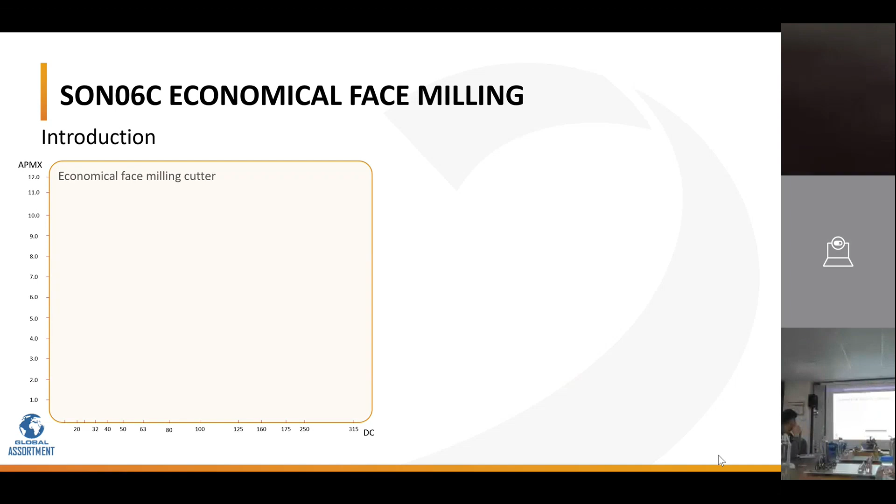If you can see here, we already have in our assortment economical face mills up to 125mm dia, the HN09 insert family up to 250mm, and again SPN13 up to 315 millimeter dia. However, a gap was found: we need a highly economical face milling cutter, because nowadays the most economic cutter stands out in the market when it comes to milling operations. So what to do for a highly economical solution?

More cutting edges, more productive cutting, and the same cutter usable for different inserts as well. This is why we have introduced this ONMX 06 millimeter insert assortment cutter, which also goes one-on-one with SNMX 8 inserts, with 8 cutting edges. Moving ahead, this goes with ONMX as I told you, and the same cutter can accommodate SNMX inserts as well.

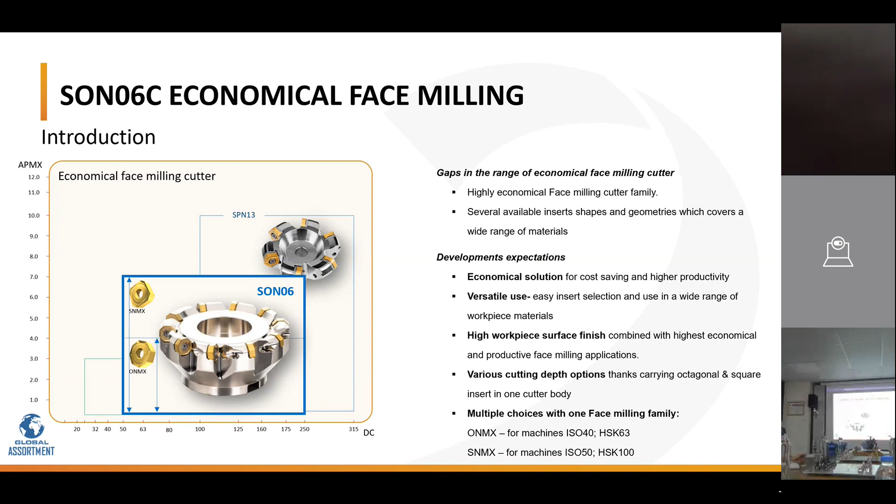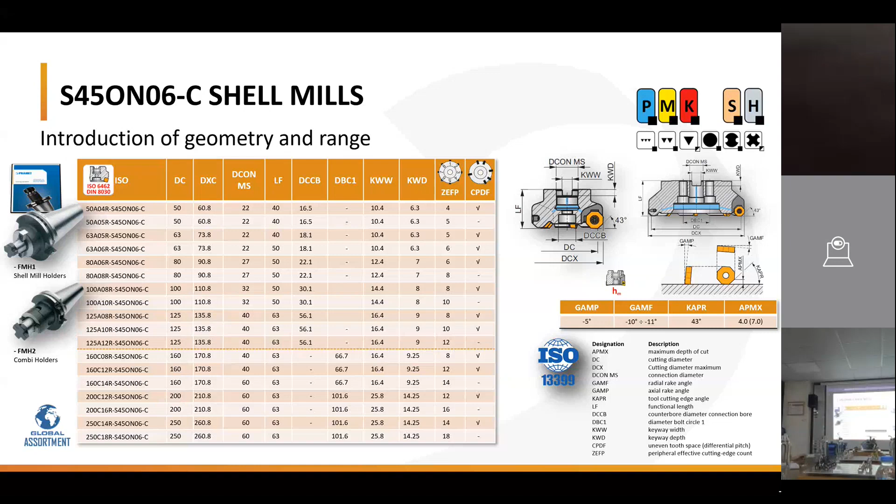So the new part is for the diameter 50 to diameter 250 millimeter cutter range, right from depth of cut 4 millimeter to 7 millimeter respectively for ONMX and SNMX inserts. And for shell mill, it is from 50 millimeters onwards. Remember, this is with internal coolant, covering all segments of customers, all components and workpiece materials, and so on. I would like to emphasize a little more on this.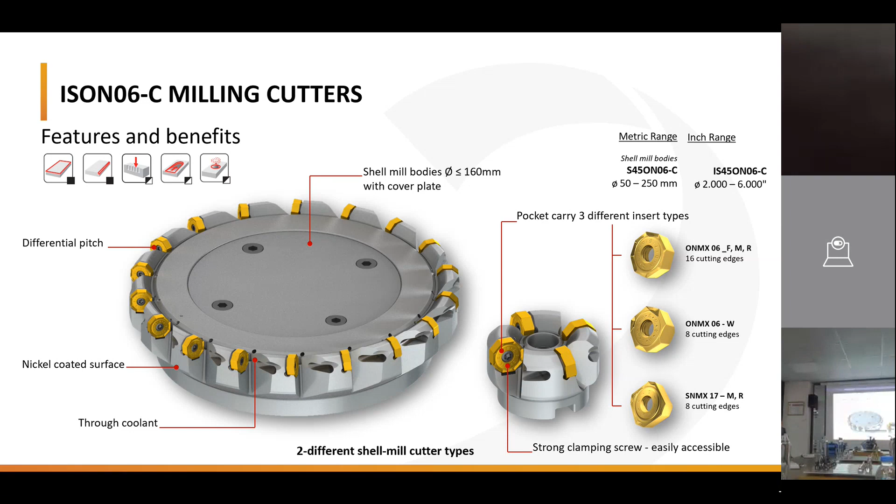You can see here the shell mill cutters with ONMX and SNMX inserts. This is for all operations, through-coolant, with nickel-plated coated surface of the cutters, and different shapes of insert that can fit from 16 cutting edges to 8 cutting edges. When it comes to ONMX 6, it's 16 cutting edges for the normal insert and 8 cutting edges for the Wiper insert.

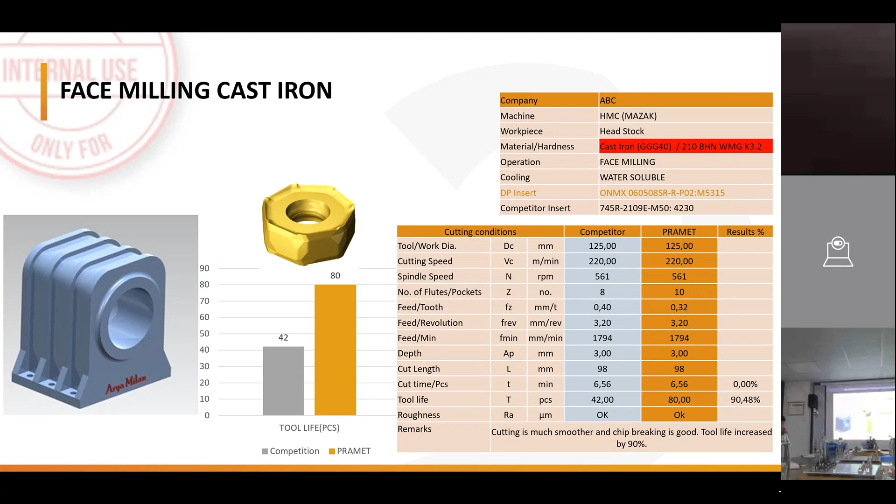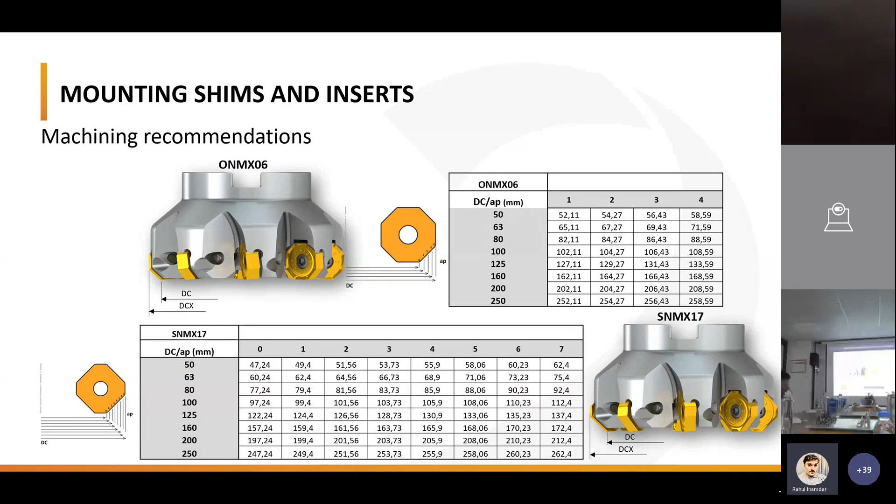Some recommendations I'd like you to remember: it carries ONMX inserts as well as SNMX inserts, but the total height will change when using the SNMX insert. In this table, the total height LF is mentioned cutter diameter wise, so please remember that. This is also available in the new product catalog, so no need to worry about that—just take care when you enter the total length in the assort program. Different diameters, from the DCX to DC, different cutting diameters of the cutter, are also available. This is also very important to remember, my friends.

For ONMX, when you use 4 millimeter or more depth of cut, you go with 8 cutting edges. But the moment we increase the depth of cut, we reduce the available cutting edges per side. Similarly for the Wiper insert as well—Wiper has 8 cutting edges, while the ONMX normal insert has 16 cutting edges. Maximum torque on the screw will be 5 Newton meter.

Also please remember the right positioning, how to apply the Wiper insert in the pocket. You can see the pocket—the cutting edge should be on the downside toward the workpiece. So that has to be remembered always: the cutting edge should be at the downside toward the workpiece.

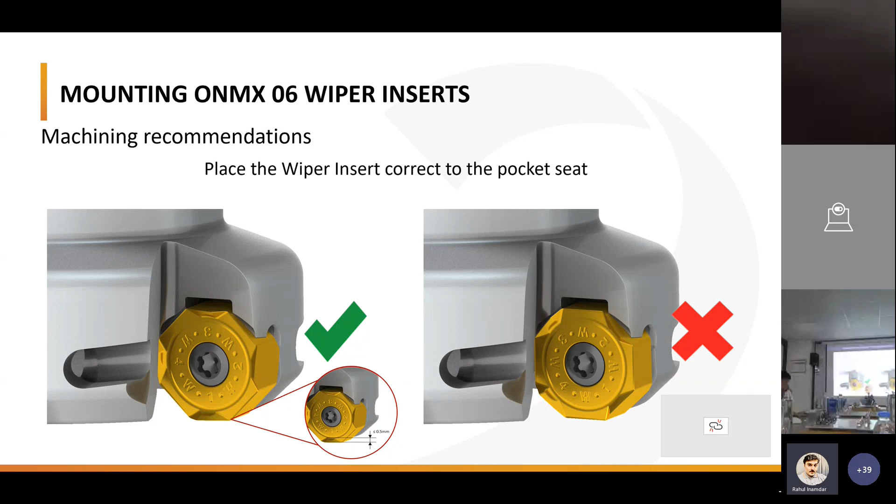Very important things to consider when indexing the insert: clean the pocket. Do not install the insert as shown on the right side—use it as shown on the left side. Use anti-seize grease or material for the screw. Press firmly while tightening the screw. Apply the clamping torque at 3.0 Newton meter. Check there is no space between the insert and the pocket seat, and don't use damaged screws or damaged screwdrivers, or screwdrivers on a damaged screw—please, they are worn out and will round off the screw head. Are you with me? That's very important.

Also, you can see here the benefits and features: a unique Wiper insert for improvement in surface finish quality for larger cutter diameters, and two positive geometries, M and R, available for SNMX inserts. It's very important to remember this, my friends.

Going ahead, let us see what else has come out in the milling family. The SSN11 high feed milling cutter has some insert extensions in HM geometry.

In HM geometry, we have the extension now in our product portfolio in this ProLaunch material. So let us dive a little bit more into that.

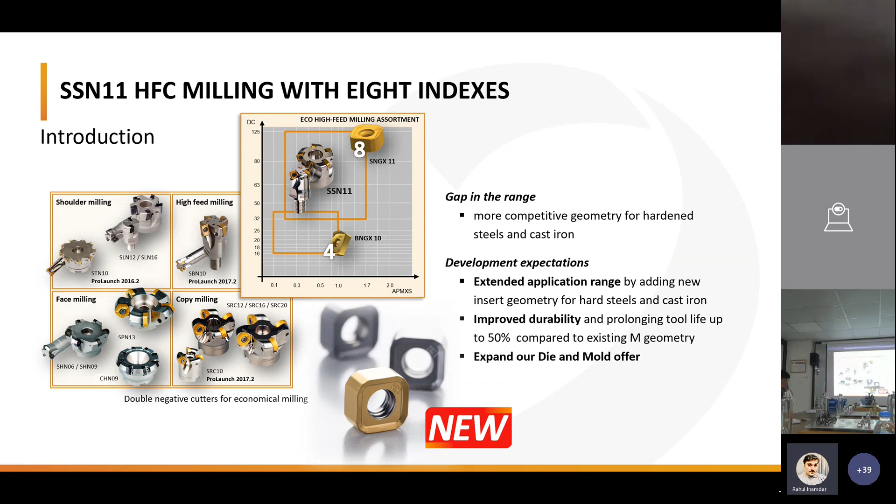When you talk about our assortment in double negative cutters for economical milling, for high feed, copy or shoulder mill, this has already been introduced. But when it comes to material with high hardness, the geometry has been missing. Now with our SNGX 11 millimeter, we have a different HM geometry with 8 cutting edge insert at 11 millimeter. That gap has been identified for hardened material, hardened steel and cast iron, and that is why we have introduced this HM geometry in this product launch as a new SN style of insert.

So you can see here in this slide about SSN11 high feed mill tools with 8 indexes we already have, but now we have a new HM geometry that works for high hardness material as well as harder cast iron material.

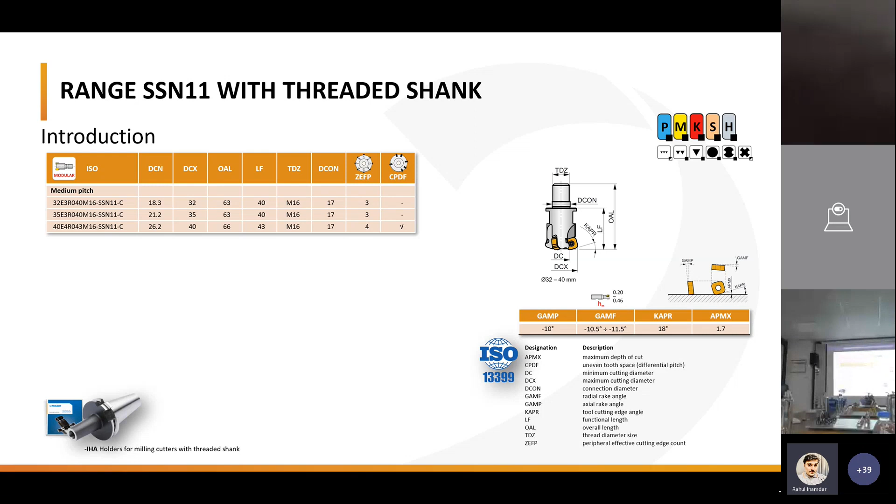You can see here the threaded shank insert cutter bodies, three different sizes when I talk about DCX: 32, 35 and 40 millimeter in threaded couplings, even with the parallel shank of the cutter bodies with 32 and 35 millimeter of the inserts are now available in our product launch. Similarly, for the shell mill as well is now available with us.

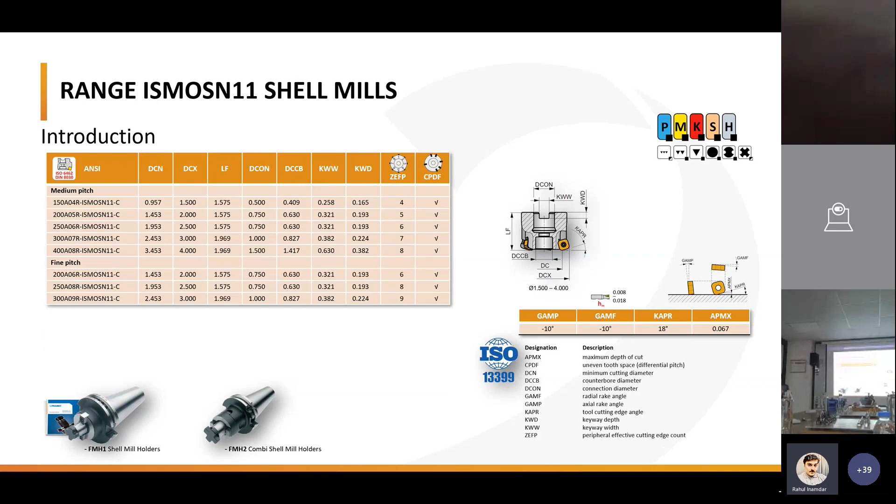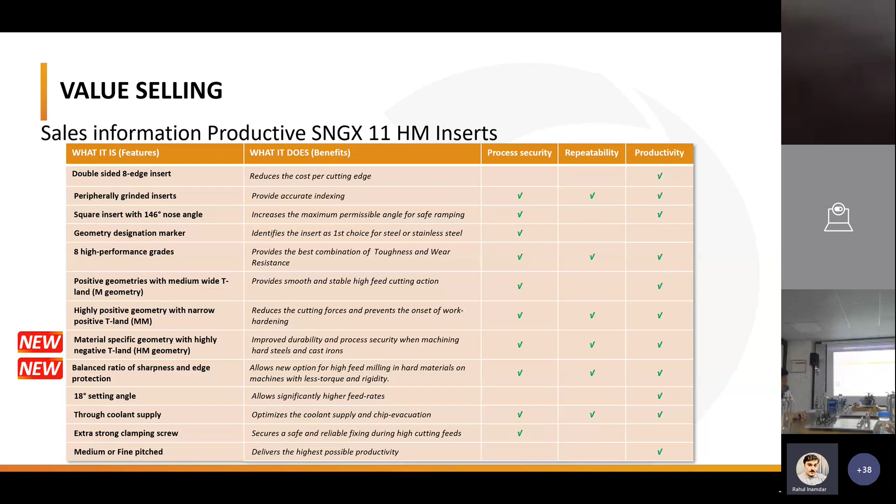Here you can see the new mark symbol specific to material geometry, highly negative T-land with HM geometry, which is a balanced ratio with high sharpness and edge protection as well. So 11 millimeter inserts are now available in our kitty.

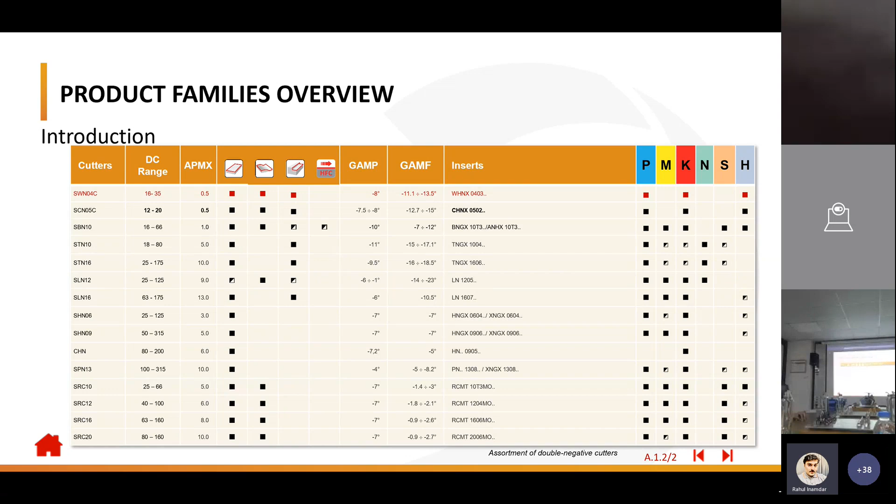Try to find out those applications where we were unable so far to deliver. Again, some launch in WN style, the new launch in WN style of cutter, double negative cutters for economical milling. For copy milling, we all know it is a trigon type of six cutting edge cutter insert, WN style. That is also now available with 16 millimeter to 35 millimeter diameter range, in WHNX insert 04 millimeter, my friends.

Moving ahead, some BNGX insert, very unique, champion, very famous. The BNGX range extension now in our product portfolio, again for double negative cutter for economical milling.

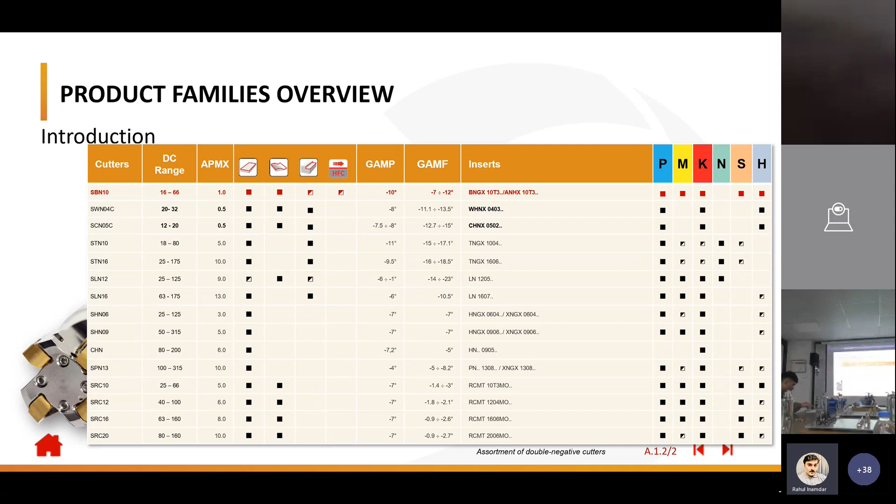So we find some larger diameters missing in the high feed milling product assortment. That has been identified and arrested in this range extension in SBN10 style of the cutter body insert. You can see here diameter range from 16 millimeter, on the top in red color, 16 millimeter to 66 millimeter, BNGX 10 millimeter of the insert is now available. Also in threaded coupling, threaded shank, and also in parallel shank, also in shell type of mills.

You can see the new diameters DCX 50 to 66 millimeter. These are new. Some of your die and mold customers require 52 millimeter, 66 millimeter, and we did not have this assortment extension in our product portfolio, but now we have it in our assortment.

So here I would like to emphasize something to you. Mounting of BNGX 10 millimeter inserts is very important to understand. Again, you have to clean the pocket seat, blow the compressed air, place the insert into the pocket, and also pay attention to the direction in which to press the insert when mounting it into the seat pocket.

Use anti-seize material for the screw. Must press firmly while tightening the screw. Apply 0.9 Newton meter torque, and you must check there is no space between the insert and the pocket seat, and don't use a damaged screw or screwdriver.

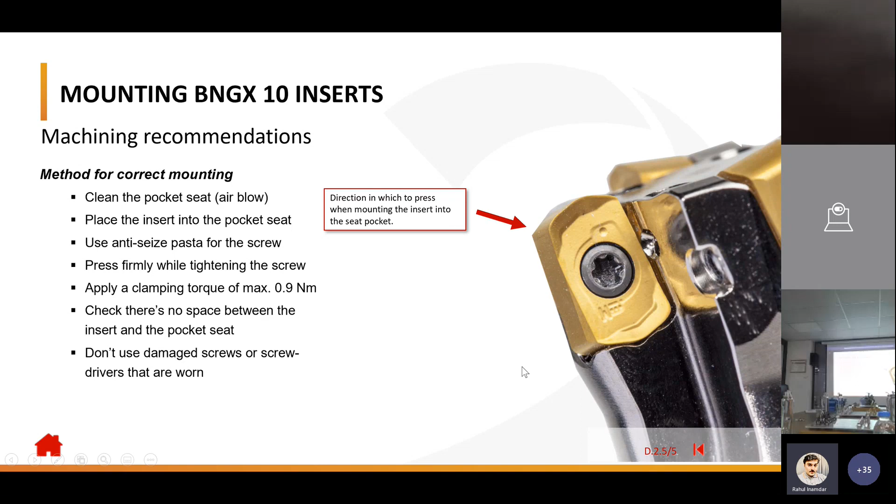We are reaching towards the end of the sessions. I also would like to emphasize in the next slide, my friends. So this is almost about the last slide.